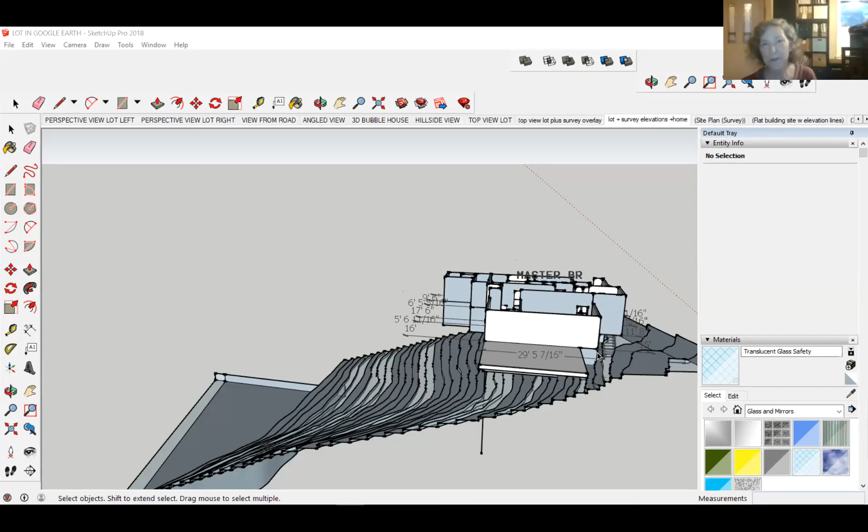Okay, so this is from the side. Yeah, okay, obviously. There's the slope—it doesn't really drop off right there, that's just where the survey stops. Yeah, that looks like a little waterfall there, but it isn't.

So I got it—I put the model in, see, you can see the lower part of the first floor, which is probably about where it's going to be. I don't want it to dip down too much. So this slab represents the garage floor. I see why you can't do what I was talking about.

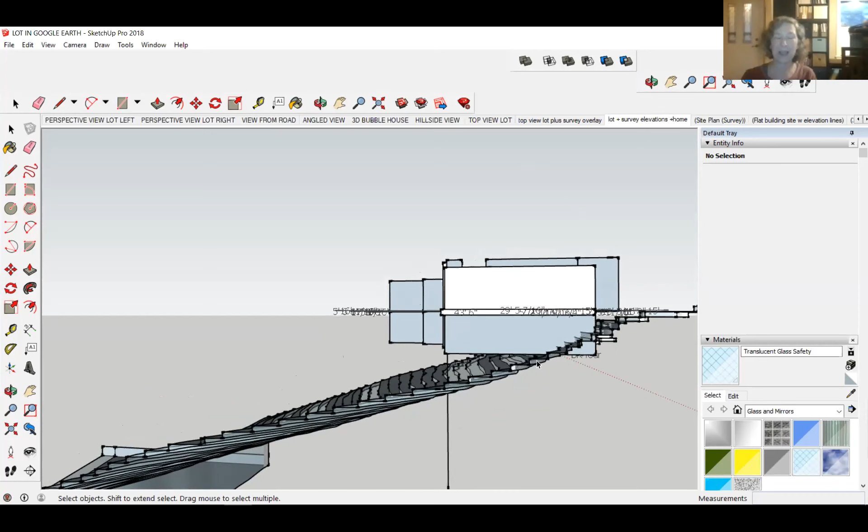And how wide is your site? The site at the very front is 90 feet, and then it splays out some. So can you drive? Yeah, you could—so if that slab weren't there. As you can see, I have it too far to the left here because I just got it set this way. I've not worked on it.

So if you're driving, it would be pretty level, but as far as getting down there—yeah, it's very steep, huh? And then, like I said, it is a pretty steep site. You have to realize my...

Husband might be able to do it. It would be back blind—you wouldn't even be able to see anything in back of you. Well, no, I get it. Big turntable that turns your car around. They do have those. They even have ones where you can flip the car like the Green Hornet does. Yeah, they do? Yeah, they do. Maybe in New York City, you drive in and the whole thing elevates you.

It's an elevator, it lowers your car into the floor. Yeah, that too, you can do that too. I think those—last time I looked—were like between 20 and 30,000 just for the gear. Then you still have to pour the walls and stuff. It's an elevator for your car. Yeah, that's what it is, that's what it would be.

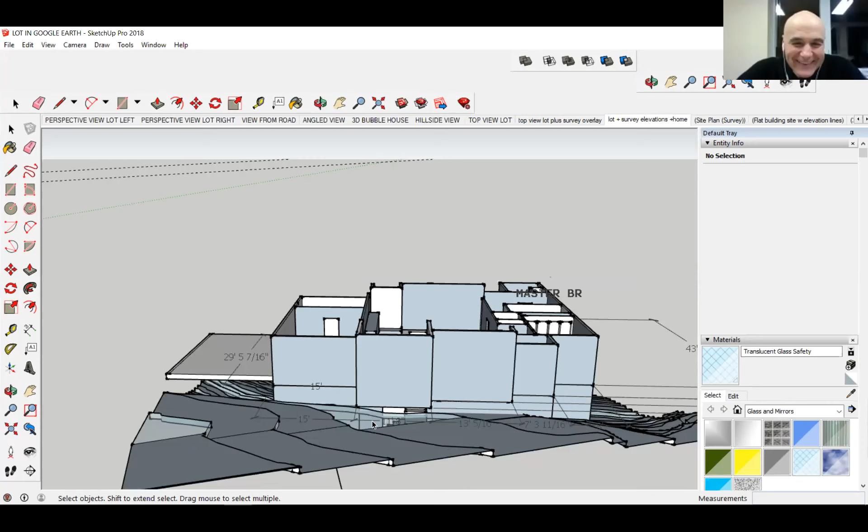But I mean, you could handle driving straight in and then backing straight out, couldn't you? That's still a front entry garage—it doesn't get rid of the neighborhood association's problem. Well, no, you would tell them it's just in addition to your wine cellar, that's why you have to get those cases down there all at once. Right, yeah, no garages. Okay, well, that's harsh.

As I drew this, the lower floor is the same size as the upper floor because I thought, oh, I have to support it, but I don't really need it that big. So is it empty space? So it's sort of like a basement, except it isn't a basement. I guess the walls are going to look finished. So if I only needed 700 square feet, but I made it 1,200 square feet, but I didn't add any more features...

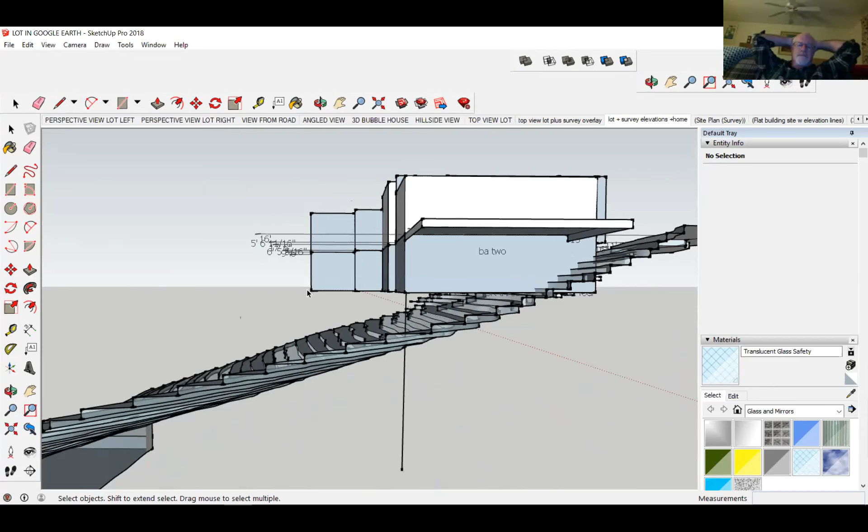I'll tell you, Carol, as a general rule, when you cover that much space that you're not going to use, it tends to become undesirable space - it tends to die. Whatever lives down there isn't what you want living down there. But it's still accessible enough that you're tempted to go in there. And then what happens is people tend to gravitate towards lattice work and other techniques for masking it. And you've got this empty space here, right?

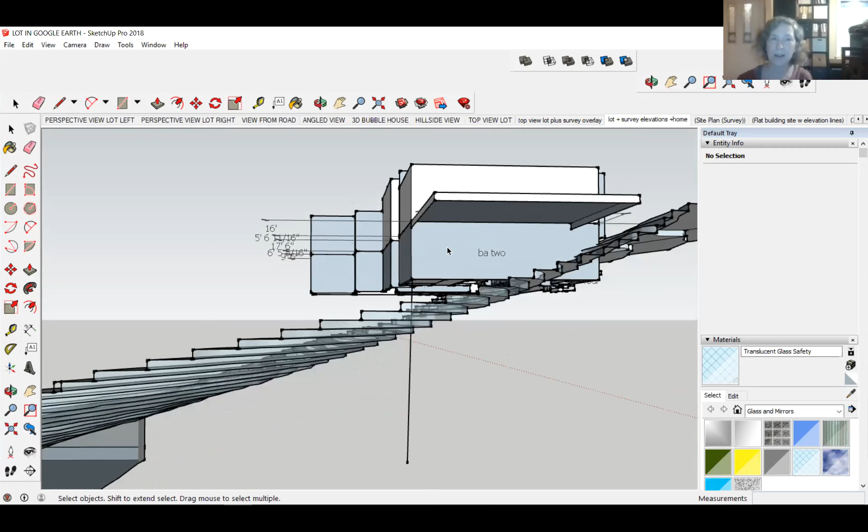It makes more sense to see if you can evolve the design so that it responds more to the site. The site is sloping down to the water. Having a building that slopes down to the water is a much better response to the site. So that would mean inside you'd have to search for places where you could get a few steps, maybe one or two, which is very dramatic.

My husband is 70 and I'm 68. We're just doing one level for the upper floor.

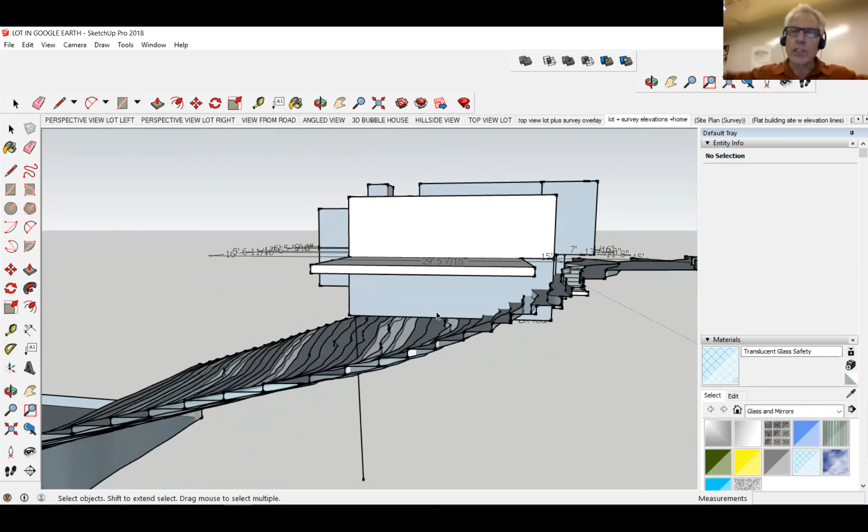One level. Well, then the other thing you can do - knowing that your home association won't allow garages, they called me up last night - is you could get rid of your concrete slab. You're going to have to solve the garage a different way, but now you can spread your house lengthwise along the contours, so it doesn't cantilever as much out over the slope.

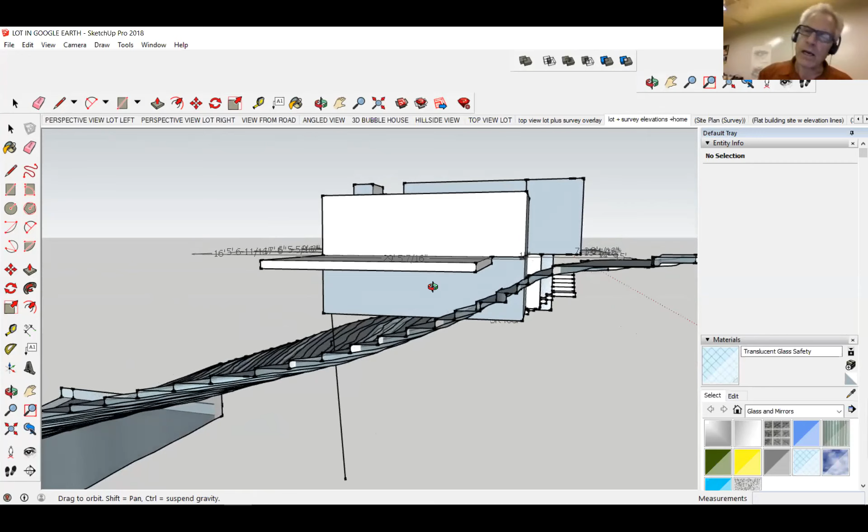In other words, instead of going - what's the direction of the water? Is that south? Right. Instead of extending south, extend the massing and organization of your house east and west. That way it'll stay collected over less slope, and you can put in a reasonable foundation and still stay all on one level. Does that make sense?

It does, but because of the side entry garage, I may not be able to expand it east and west very much. You mean you can have a garage if it's a side entry? Well, right now that's the neighborhood rule. I'm going to try and get a variance or exception, but...

Oh, I thought they said no garage. So you're allowed to have it if you can come in from the side? Oh no, I was joking about in the future - maybe there'll be no garages. No. Yeah, right. I think the future's coming soon.

Right now it's just side entry garages - they don't want to see the facade of the garage. I understand that, they're not pretty. So that's trying to get around it by aesthetically making it look fine. I assume that's their objection - would be the aesthetics.

But right, well, you're right - then it gets more squished this way, and it's going to stick out even more. So it looks like you have maybe a little room on the west side. Yeah, no, I haven't centered it east to west right - I just got it centered on the...

I was trying to get the drive-in level, not too far - it's already like 3 feet down from the curb. That would be enough. But that's working for you because now your site is widening.

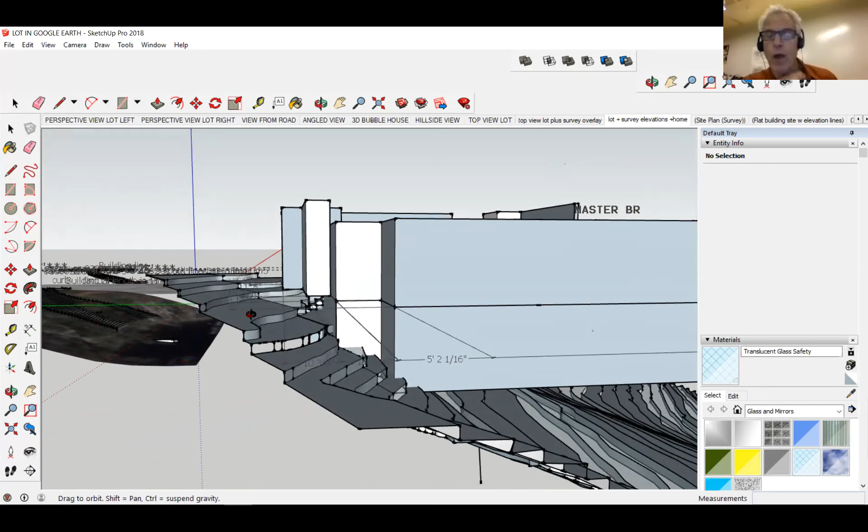So is there a side setback? Do you have to be 15 or 20 feet from your side boundary lines? This line right here - that's the building line. Right, but what about on the sides? Oh, it's an odd one - it's 15 feet collectively, at least 5 on each side. Perfect, so you've got quite a bit of space.

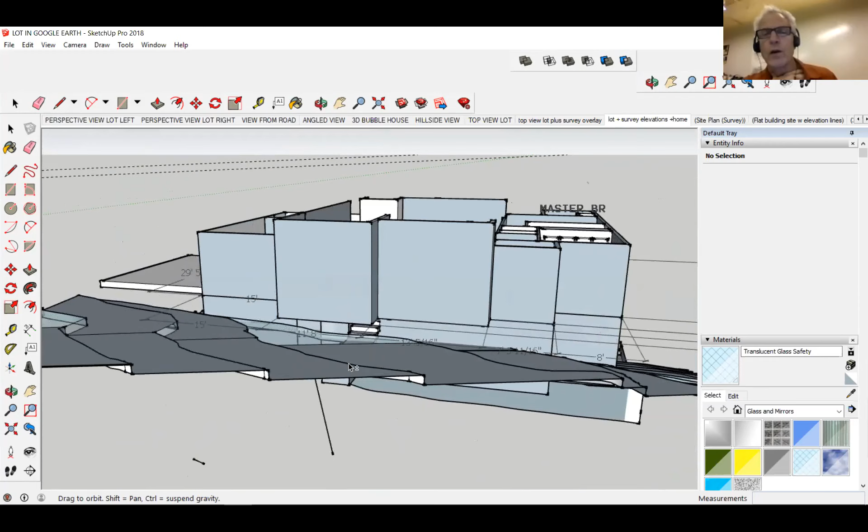It looks to me like you have 20 feet of latitude there that you could reorganize, particularly if you're going to. Right. If I do the side entry garage, I'll have to shrink the house some. I've shrunk it some already. I'll shrink it even more. But if I can do a front entry garage, I can spread out more east-west and pull some of this mass. Right. Yeah. I guess you're in a fork in the road.

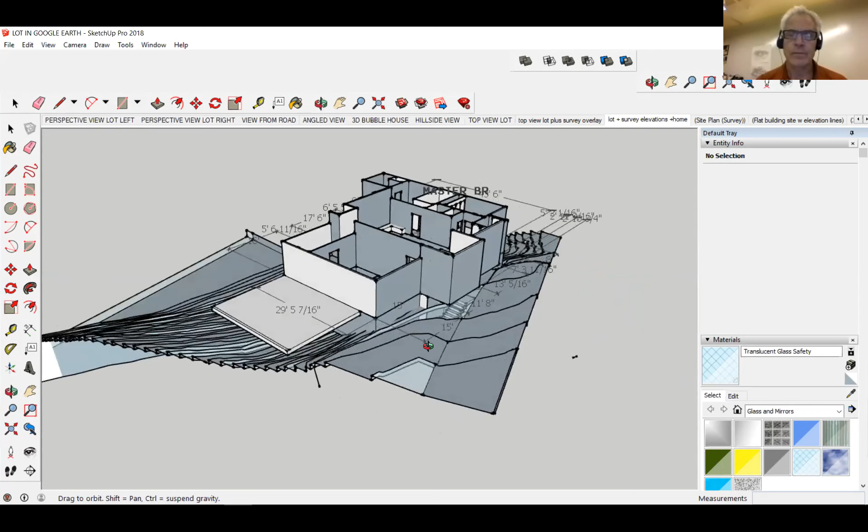If you can get some sense of whether you're going to get a variance, that would be the first step. And then in the meantime, you could assume that you're not going to get a variance and see how you could change the design to compact it more, bring it back a little bit, flatten it out, even though you know you're going to have a garage. Yeah. It's a lot of house for that site.

The other thing you can do is. Yeah, no, I need to. I keep walking around my house and measuring rooms, and it's hard for me to visualize how big a room should be on paper. Yep. Being in the space. So, yeah. Well, it's, yeah. I guess anything I could do.

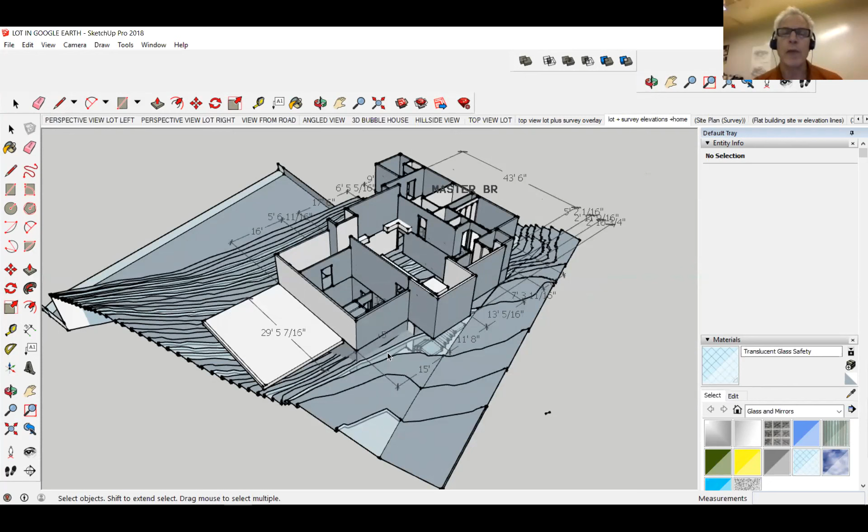I mean, you could start. I know it seems like a painful thing to go backwards, but you could start by just saying, okay, all my mods are going to have to be 14-foot mods. Yeah. Except if I'm doing panelized, then I don't even have to. Yeah. That's true. I'm trying to constrain you. I'm not trying to give you more freedom.

So you're right. With panel, you're moving with every step towards stick building. You have more flexibility, and panel is a big step towards flexibility. You're already in Texas, so you have 16-foot modules down there, even 20-foot modules in some locations. Okay. Yeah, but of course you can't change them. Well, I'll see what Ironwood has.

So anyways, that's right. I'm stuck on this garage stuff, and then I got sidetracked. I started researching heat pumps and stuff, which is way too early to be looking at, but it was so fascinating. It was either in the last set of slides. I was reading about heat pump hot water heaters. Sure, GE makes them. It's like, whoa.

So is there such a thing as the heat pump and the hot water heater all being one system? In other words, hot water heater is very expensive. But I didn't know if you had heat pump for everything, whether there's a big combination thing. No, I haven't seen it. Gio, have you seen a combination hot water and HVAC that's all run by one heat pump? I've asked about that, and they don't exist yet.

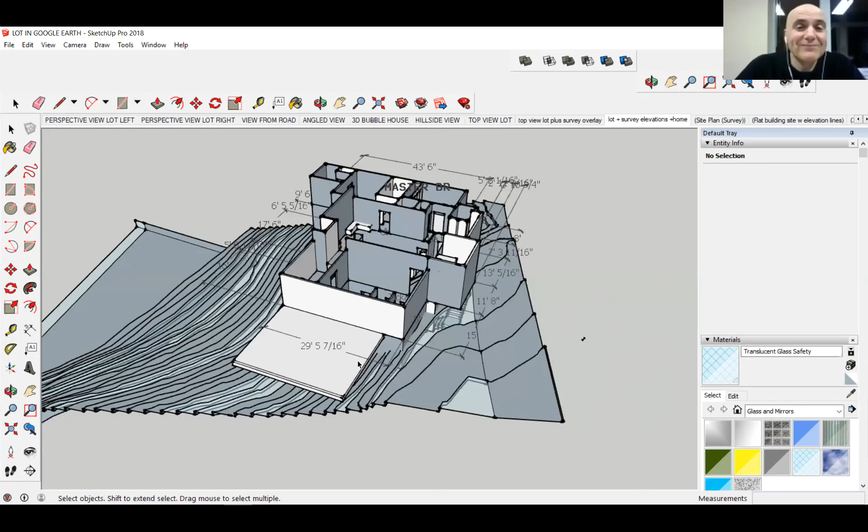Yeah. I hear gas is going to go up in a few years anyway, and it's not good for the environment. So. That's right. You're correct. Oh man, you're saying all the right things. Yeah. Right. So I guess I'm stuck between the tankless versus the electric heat pump as far as the water heater. Well, anyway, like I said, that was a sidetrack. I shouldn't have even been looking at that.

Well, that's good that you've done that. That's a leg up. So anyway, that's where I am. I had hoped I would accomplish more, but I didn't. But I have really one more question for your side garage problem.

Sure. It looks to me like you've embraced at least one full set of stairs. Yes, and I probably don't remember, but here's my stairs. Right. Is that an elevator there? Yeah, because of the wine cellar, a case of wine's 40 pounds. All right. And we'll be getting older, but mainly cases of wine, yeah.

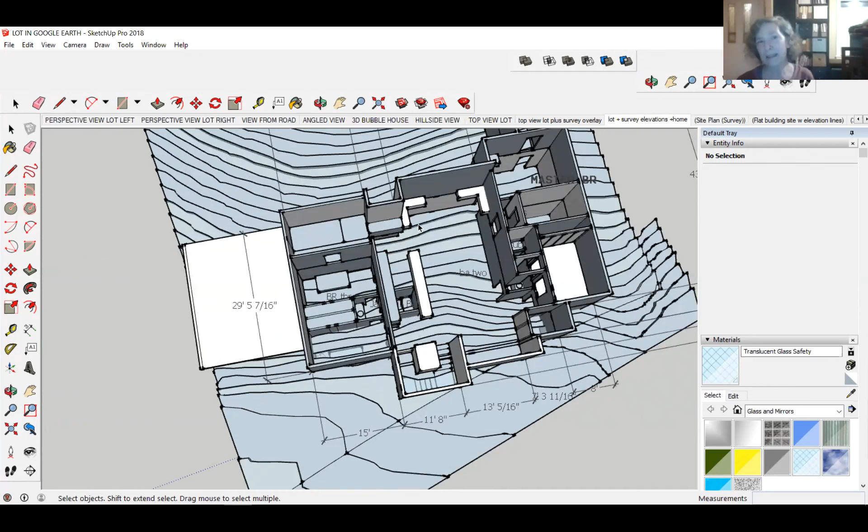So I just had the stairs wrapped around the. Well, no, I like that. That's great. But I don't know whether to put it in the back. That was the other spot, to kind of put it back here. No. The question that I had, I'm still struggling with your garage, I'm thinking, how imperative is it to be at the highest point on your site in terms of view?

In other words, could you slide down the hill a bit? Sure. Or maybe you don't slide down the hill, but another thing to consider is to make the house upside down. Put all the living spaces that are above below, and walk down to them. That way you could actually have a side entry garage on top. And the bigger space would be downstairs.

Yes. The downside of that strategy is that you would lose north-facing windows in your spaces. The upside is that your air conditioning bill would be way lower. All your bills would be lower, because it would essentially be an earth-sheltered or earth-bermed residence. It doesn't mean you would have no north-facing windows. It means they'd be much smaller and fewer.

No, I think there'd be no. If you look at this, I think. Well, maybe a clerestory. That's what I mean, clerestory. And also there's light tubes and other contrivances for getting sunlight in. But the real payoff would be that you would have so much less building up on top that you could actually park and even probably have a side entry garage up there. And then walk down.

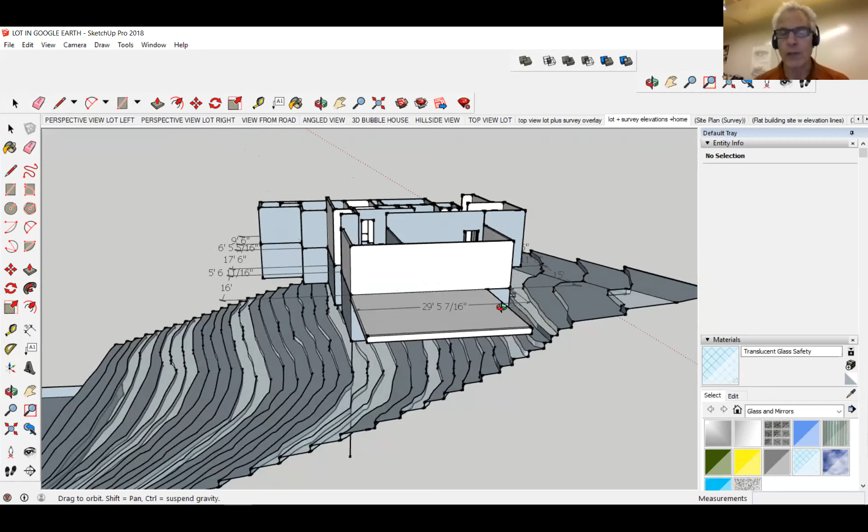Yeah, absolutely. There's a lot of really very satisfying and sophisticated designs that go on steep sites in just that fashion. They really separate where you want to have something that's going to need a really great view. You put that on top, but something like a bedroom, you can put that down below. And for that matter, that's why I've got the extra space down below to start with.

But that whole master bedroom, that's a thought. I could just move all that downstairs, and then I would have more. But like I said, I was just trying to get away from having to take the elevator every day. Practically speaking, it's nice just to live on one level. Well, I know, but you have a challenging lot for living on one level. Right. I'm still trying to have it all, so to speak. Ideally, it'd be nice to just close off the lower level, have some kind of doorway that closes off the stairwell to where we're just heating and cooling the top floor.

Anyway, it's a very instructional project that you've taken on because it demands design. It demands problem solving. It's not just a subdivision lot where you can... Yeah, I should have realized at the beginning. The modular ones I've been looking at, there isn't any way to modify them. Like, well, I need an elevator. It just isn't going to work. Yeah, right.

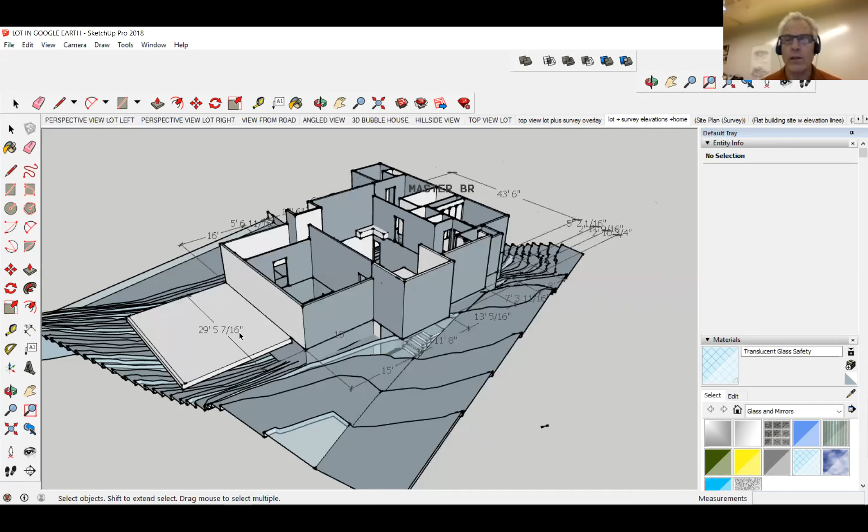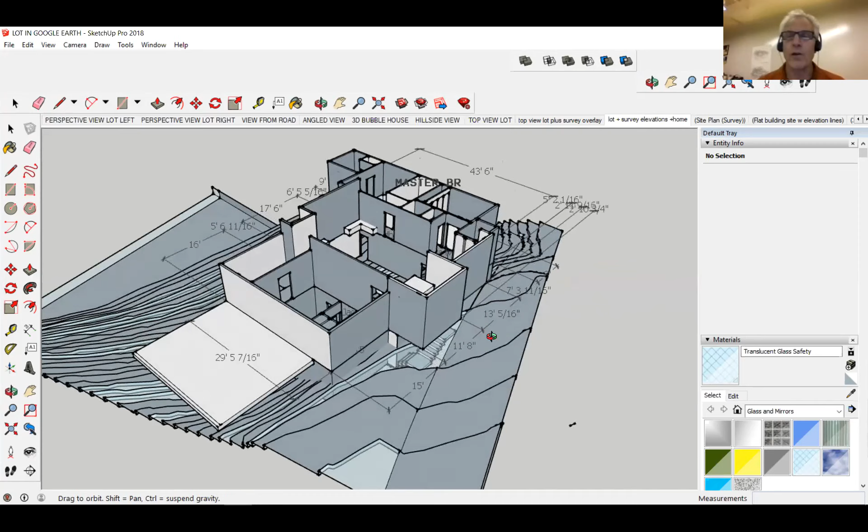You don't have to wait till next class if you want to email myself or Gio about your phone call to Irontown. See what they say. So you want to be on the phone when I call them? Sorry? Or call them first. So call them first. I'm going to call them anyway, but I think you should call them as well and just say, I'm in Texas where all the prefab people don't do custom building, and I understand you do. And just see what they say.

Sounds good. Okay. I'll let you know. All right. Great. Okay. That's it, I'm done. All right, who's next? Come on, step up. Anybody who doesn't have a side entry garage can go now. All right, I'll go. All right, Mark.

So I did visit a couple of builders last week. I went first to Bensonwood. Very impressive what they do. I particularly like their smart panel system. And although I don't at all see using them, it's possible that I would like to, with whatever means I ended up using, emulate a lot of their smart panel ideas.

The visit was disappointing in that I made an appointment. I made it clear that I wanted to be able to see their operations and how they built things. And when I got there, I was informed that their manufacturing was 8 miles away, and even if I wanted to drive 8 miles, they were having an OSHA inspection that day, so I couldn't see it. So basically, I drove 3 hours to sit in a conference room and look at a computer. I have to say, I was pretty annoyed.

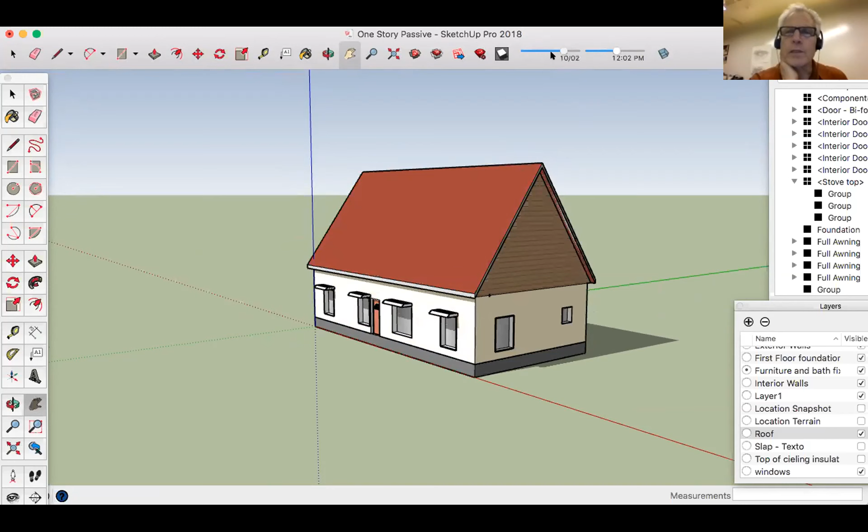From the outside, I did geolocate this, and you can see from the awnings that this is summer. Why is this not working? Oh, there it is working. There's winter, pretty close to full exposure. You're looking at the south side. Mm-hmm. How about summer? Give summer again. I always miss summer. Okay. There's July.

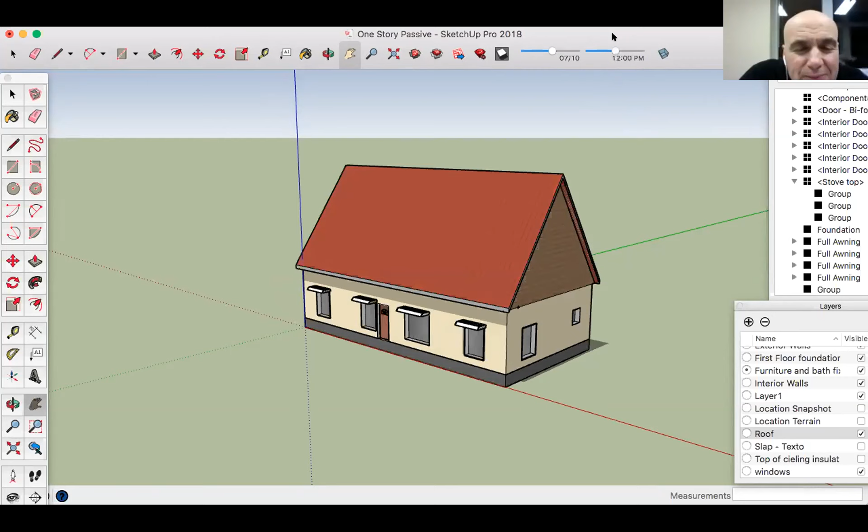Why is this not? Oh, that's because it's 12 noon. Okay, that works. And the windows are completely shaded. They are? Yeah, you can't tell, but they are. Okay. Oh, yeah, I see. Okay.

Two bedroom, two bath. This is the mechanical room here. Entrance foyer, kitchen, dining room, living area, second bedroom, second bath. Laundry? Hopefully be part of the mechanical room. And the mechanical room is next to the bathroom? Yes. Is that a no-no? No. How big is the mechanical room? It's about 7 by 6. That's pretty tight. You don't want your laundry in there.

Your master bathroom, the one to the right, that's very commodious, and you have room there for the toilet plus probably even a side by side. But certainly a stackable, and you'll be a happier guy taking your laundry out into a bathroom than piling it up on a water heater. Because the utility room is just big enough for the CERV, if you're going to use a CERV. Right, I like the CERV.

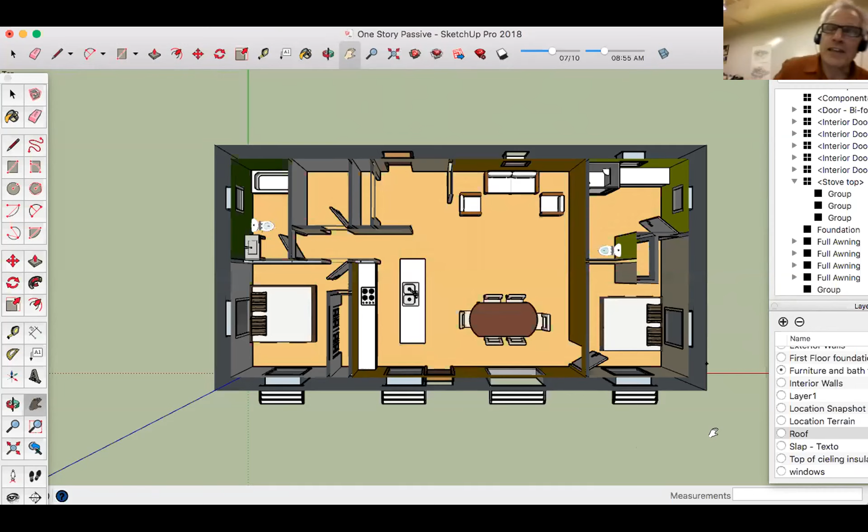Well, I want to applaud you for first mastering SketchUp enough to be fully tempted to make those additional design changes, but not doing that, and instead saying this is just a trial building. The fact that it's not everything you need is fine for the purpose of this course. This is a great design for shopping different systems. It's fully adequate, and we could all spend another 6 weeks tuning it up, but first you have to find a site. I think from here I would start from scratch with what I really want, but I first need to have the site. Yeah.

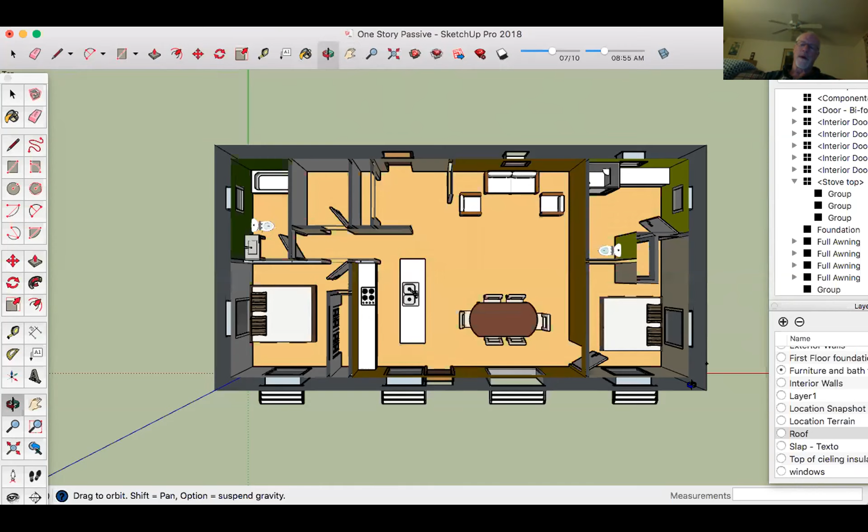But it was helpful for me to have a simple house to get over the hump with the help of Geo with SketchUp. Great. What else would you like to see in this? Just before the class, I did some sections. Aren't they fun?

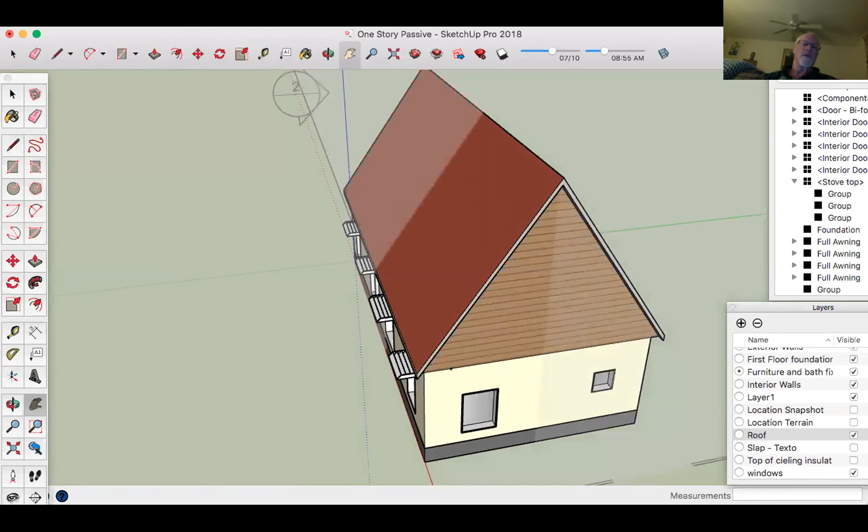Okay. Well. Yeah, there's a lot of space in that roof. A lot of space, yeah. I could easily put a couple of... I mean, I think the 8-foot point is probably about here, so you could have some pretty good space up there. Sure, great.

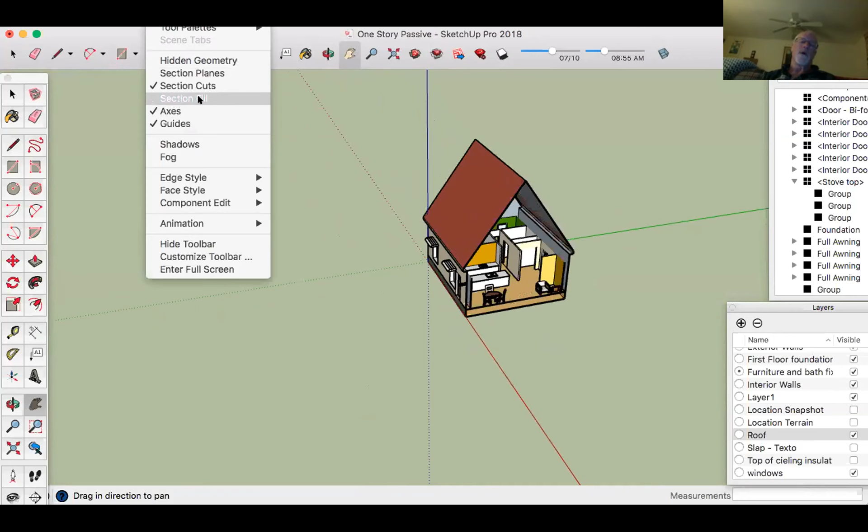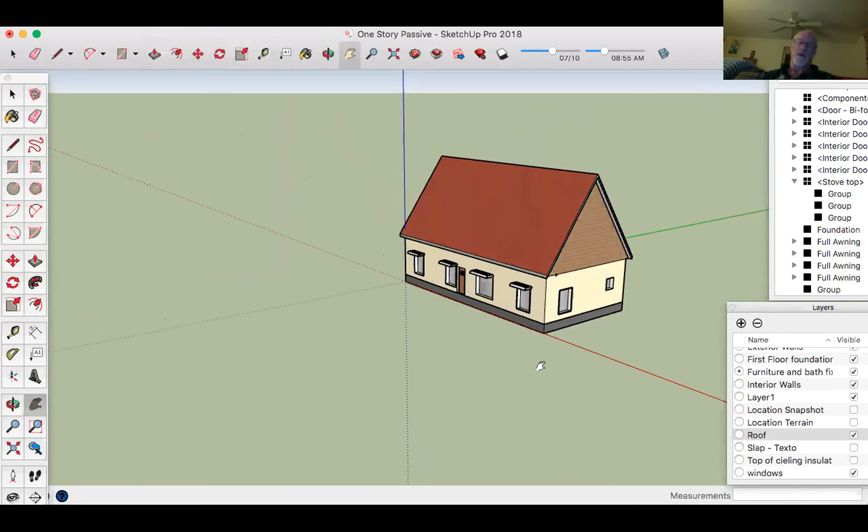Yeah. Well, there's another thing going on here in that NYSERDA in concert with VEIC want to place a ZEM manufacturer in basically my area. Wow. And in fact, along with a contractor friend of mine, we're in discussions with Peter to actually start that manufacturing. Nice. That'll be exciting. I'd like to track that. That sounds good. We all want to have a ZEM factory in our neighborhood. Yeah. So I'm pretty excited about that.

Timing seems to be kind of perfect in that VEIC is concluding a contract with NYSERDA for this program. So, and Peter seems to be pretty high on it. So, of course, a zillion things could derail it, but it's something that could happen. Oh, nice. We'll look forward to hearing more about that as it becomes available. Yeah, that's great.

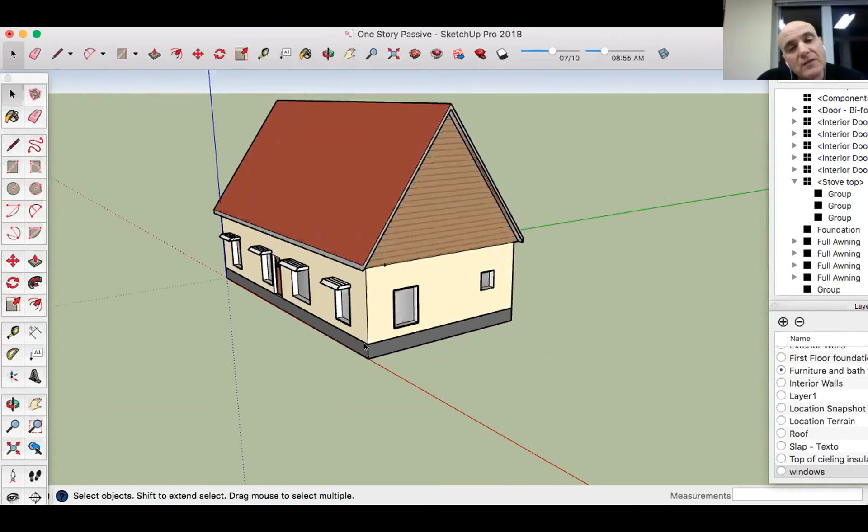The only other point I was trying to make is that when you're doing this, the hot box you're talking about, you'd have to arrange your bathrooms and your kitchen so that the drainage doesn't have to travel that far, because there's a slope to the pipes as they're traveling. What is the slope that's required for that? I think it's a quarter inch for every foot.

It's somewhere between an eighth and a quarter inches. If you go more than a quarter, the liquids will outrun the solids. If you go less than an eighth, even worse things happen.

Use your imagination. Right, I can't imagine what you're talking about. No way was I trying to dissuade you from trying something new, but just keep in mind there are practicalities you have to think about.

I have more solidly come to the conclusion that I do not want a basement. When I've done the numbers on it, I think the whole idea that it's free space is incorrect. No one said free, I said cheap—I don't know that it's even cheap. Other people I've talked to have been supportive of that. Besides that, I don't like doing stuff underground, so I'd rather put the space above ground. There's radon and all those other issues too.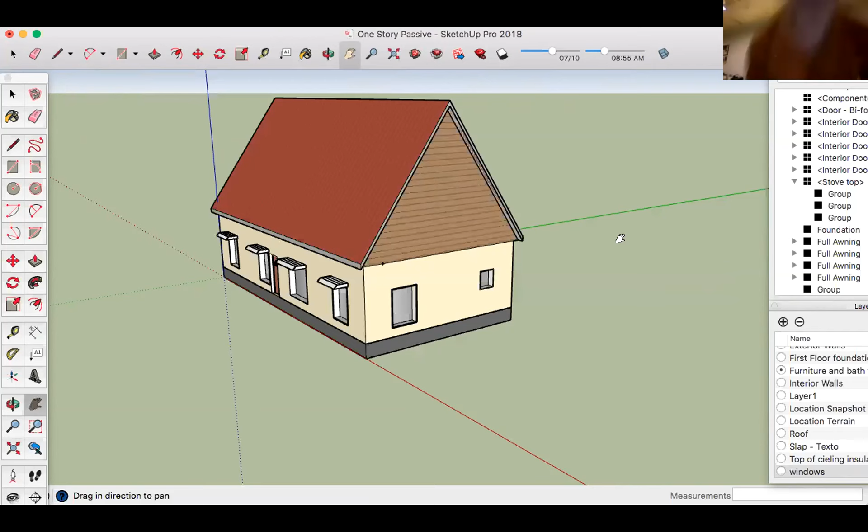So you've got 4.5 feet that a person can do some work in there. If it's a really tall guy, even if he's on his knees, he's probably gonna be bending down a bit. But if it's a normal sized person, then at least you've got some room. And you really want that room for a person to get down there and do that work.

So the condo that I live in has a crawl space underneath, and I'd say it's close to 5 feet. Yeah, and I think that's adequate. I've done stuff down there, and it's okay.

Another part of the motivation is I'd like to be as environmental as possible, and I'd like to be foam free. A foundation with just a crawl space can be foam free, but any kind of a slab is going to need foam.

The other thing is, by making it a crawl space, you don't have air going through, and you're tightening it up, you're helping tighten up the rest of the house. So if you really want a house that's tight, and you don't want air going through underneath the crawl space, this helps pull out some of the air that's in your home. It just makes sense.

At one point, I was very attracted to the idea of a polished concrete floor, but the word I've gotten from one of the workshops is that even with a ton of foam in there and insulation, it's cold.

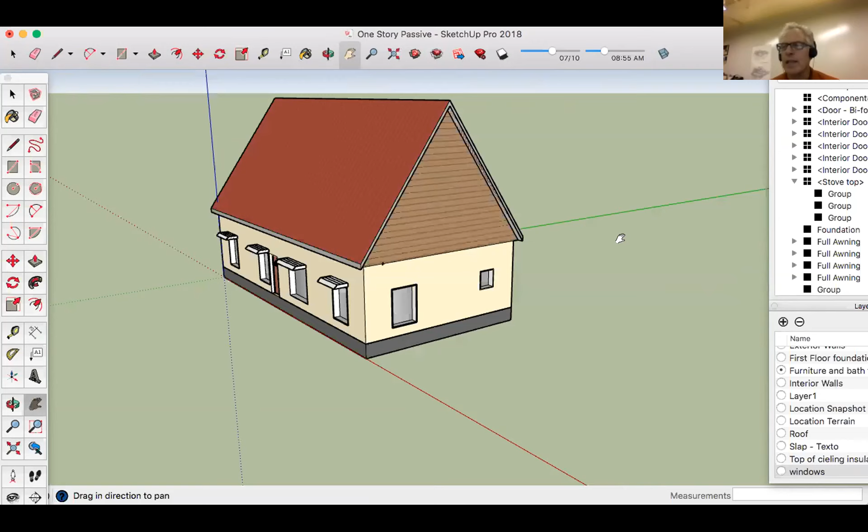Where I see it mostly fail is where people embrace it as a cost-cutting measure. Oh, I'm going to put it all on piers and save all this money. And then, yeah, they get the job done partially, but it doesn't look good. And it's not an enhancement to the house. It looks just like what it is, an attempt to save money.

So I guess what I'm saying is, just like Gio has just said, if you go in with your eyes open and really design it all the way through, not just, yeah, it's going to sit on this foundation made of piers, it can be hugely successful, and it might save you money. Which is always a good thing. I like the might part. I was assuming it definitely would save money, but I've been around too many money-saving deals before.

Mark, nice job on the model. It's come a long way since you showed it to me. Yeah, that's compelling. So, all right. Do you have any other questions? Nope. Thank you. All right. Wonderful. Okay. Ron and Joseph, who's going to go next? I'll jump in here. Shoot. Can you hear me? Yeah, very well.

Hey, you know what? With a time commitment, 3 teenagers and a new job, I'm afraid I'm just going to have to audit this time. I see this as a terrific opportunity, especially to tap into resources like you guys, but I just don't have the time to do it justice. So that's where I'm at. Okay. I think if you worked it right, you could get those teenagers to help you. The ones I know are very good with computers. Teach them SketchUp, maybe they could do it for you.

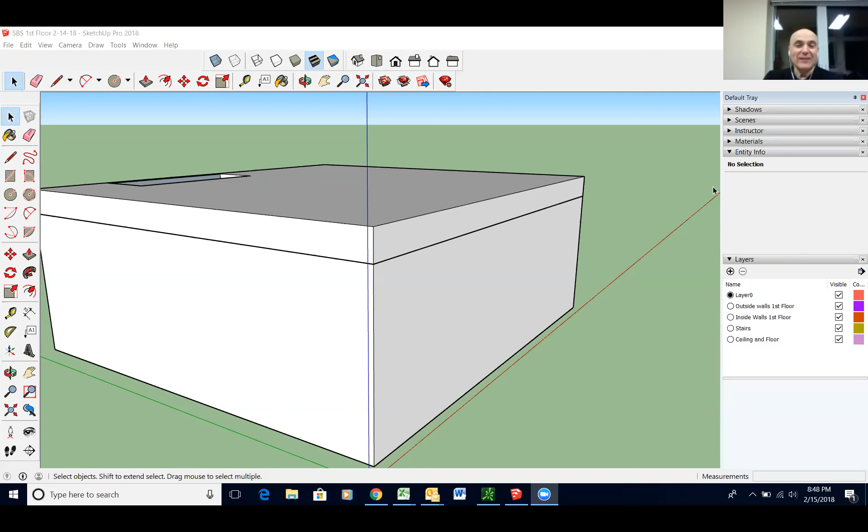So do you want me to go into my design? Yeah. Show us what you got. Okay. Well, it's not as much as the previous two, that's for sure. But let me. You see that? Yep. Talk about boxy. That's boxy, that's for sure. Let me, I got to get over to the screen. Let's go right to the stairs. I did the stairs. Where's the garage? It came out right. What happened to the grooves that we were working on? There's the stairs. All right. Okay.

Okay. The picture is on the wrong side here. Let me just move this. Okay. Great. I got to request some help. I am challenged with SketchUp, and it's really slowing me down. So I'll be reaching out to Gio or John to give me some help. Mm-hmm. We've only been hounding you for the past 2 weeks. I know. It's all right. It doesn't matter.

Yeah, right. We need to reach a little further. Today was a Utah powder ski day, a powder day. Okay, so I do have my priorities. I know there's no powder days out there. I was out there since our last meeting. You were out here? I was in Park City. Is that right? Oh, Park City doesn't get the snow. Alta does. You go to the wrong place. Well, I agree. Yeah. I heard reports. Park City is not good.

Anyway. But I did do some interesting layers and whatnot. Let me take off the other side. This right here is the ceiling for the first floor and the structure of the floor above it. Let me just. Oops. You gotta see the little black dot? Take that off. Layers, yeah, take that off. Put it up to layer 0, and then you're set. Okay, now you can. There you go. Okay. I put the walls in.

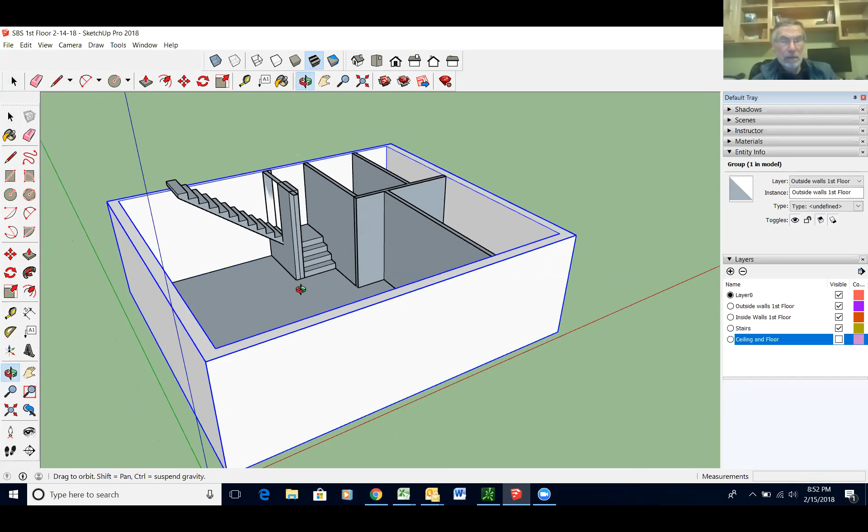Okay. The entryway is here, utility room here, bathroom here, and this is an open area, the kitchen back here. Oops. Yeah, which I haven't expanded yet. But I did take your suggestion, John, about the kitchen. I think it lays out much better. But there was a wall in here, and I put some furniture in, and this is really, really tiny.

And I'm trying to figure out a way of using modules, but get a little more room. And I need the room down here, not on the second level. No problem. It's too bad it's not dotted in, but you see what's called the marriage wall or the mate wall that runs between the 2 mods right there. So there's nothing keeping you from taking the front mod, the view mod, and just stretching it further to the right to give you more

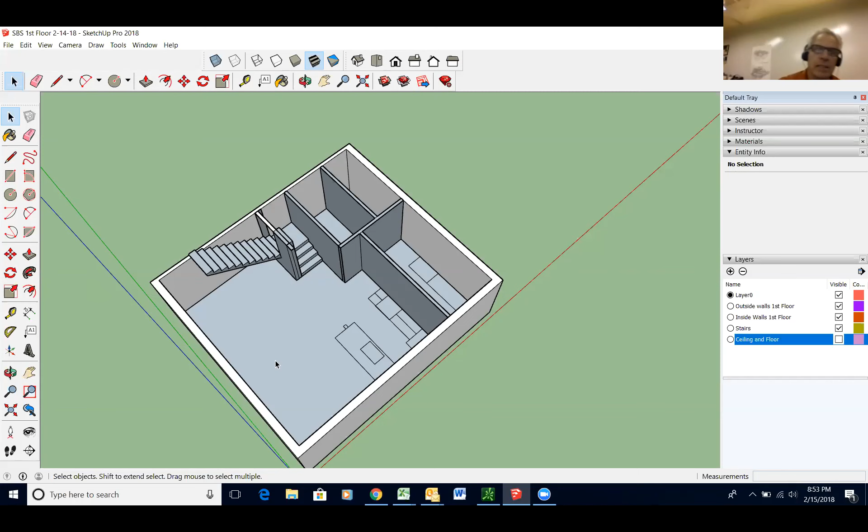living room. If you keep the back mod the same dimension and stretch the one in the front out a bit, you're not only going to have more area to put furniture, but you're going to get a northern view window that can look back. It doesn't need to be a big window, but it's nice to be able to see all sides. I'm not following you, John. Right here is the split line. Okay. Right.

Right here, there is a post because I eliminated some of this wall. Right. So if you go to the other outside wall, the one to the east, the eastern wall. Oh, okay. That one. So there's going to be a split between the front and the back box, right? Right. So if you drew that line in, let's see. Now I'm putting you on the spot. How would you do that?

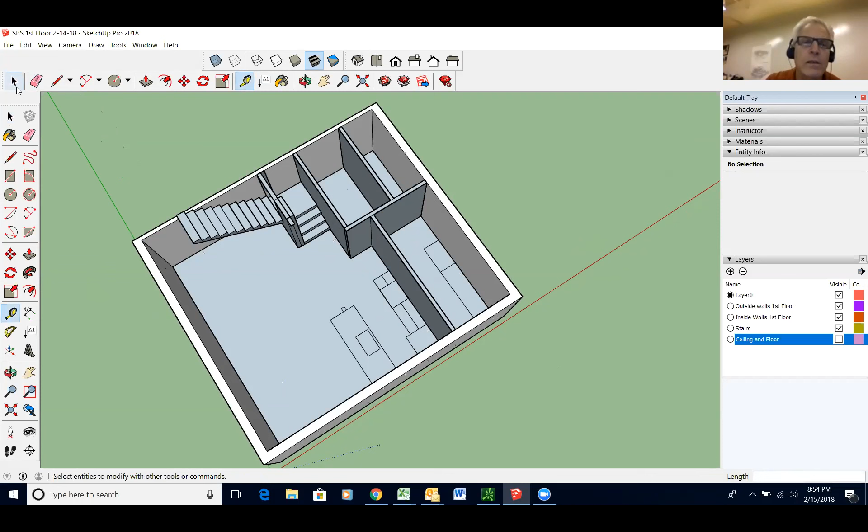You would get your tape measure and pull it from the front corner, right? Or no, rotate it up a little bit. Just rotate your model up a little bit so we can see that. Oh, there you go. Okay, that's good. A little more. That's good. Now take your tape and put it on the corner. Just hit T. Okay. Not there, but about halfway down the corner of the building.

Right here? No, halfway down. See the corner of the building? Yeah, right. Now go down to about halfway. Slide it down. Okay, right there's fine. Now take it and pull 14 feet to your right. You can just type in 14 feet. All right, wait. You got it, don't worry about that. Okay, now just type 14 feet. There you go. Return.

So now take your pencil and draw a line down there. I'm gonna be sloppy here for a minute. Actually, now draw the line up over the top edge there. Be sure it's on axis. Don't go to the midpoint of the group. You might have to zoom in on that. Okay, that's good right there. Boom. Now take your push-pull tool, it's just P. What am I going to push-pull? Tell me what you're going to push-pull right there where your cursor is.

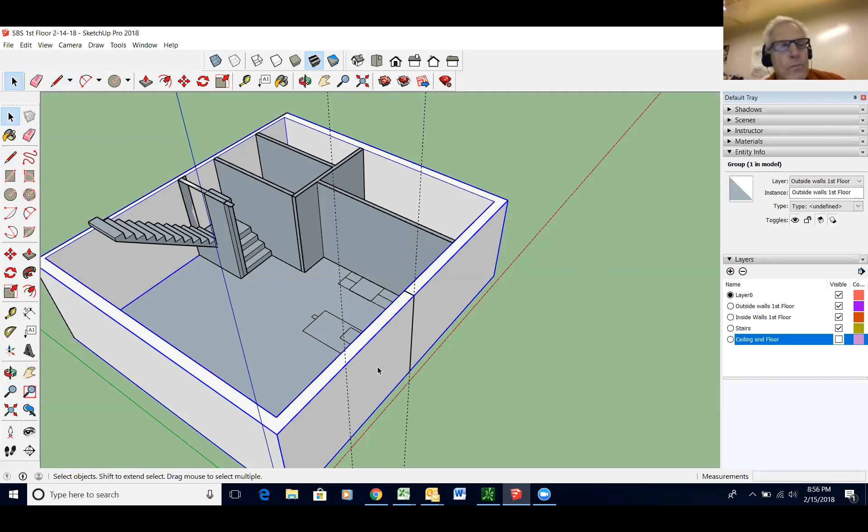Oh, you got to open the group. Okay, that's fine. You're going to have to draw the line again. That's all right, just draw it right over that one. Yep, and then down. There we go. Okay, now push-pull that. Which way? To the right? To the right, say 4 feet, 6 feet, whatever you like. There's a limit, okay. Now you got to rotate around so you're looking at the inside of the model, because you got to draw the inside line. A little more rotating.

What am I looking for? Oh, there we go. Now we're talking. Right there's good. You got it. Okay, draw that line down. L or P for pen or L, whatever. Yep. Okay, good. Now take your tape and measure.

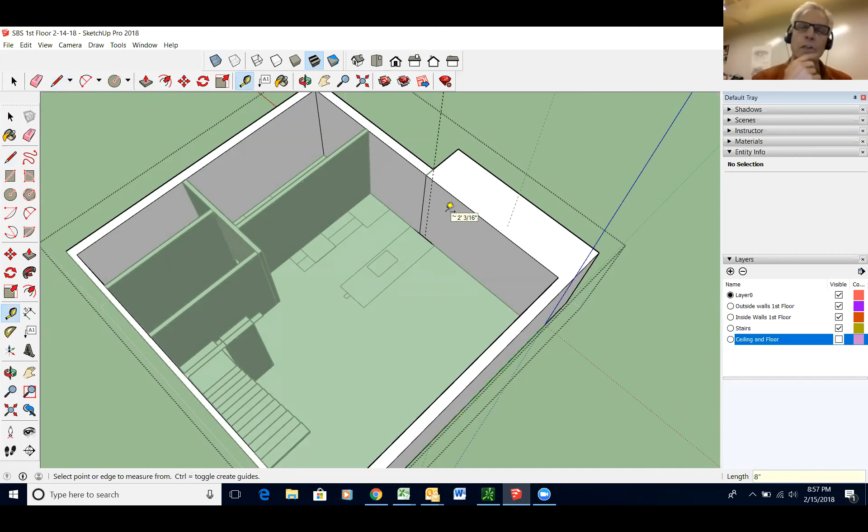Take your tape and put it anywhere on that line you just drew, and pull it in 6 inches or 8 inches, but just pull it to the right. 8 inches? Sure. I don't know, whatever your exterior walls are. Usually they're 10 inches. Okay. Well then, now draw a line there.

Right. Okay. Now use your push-pull. What did you pull that out for? 3 feet before? It was, I think, 4 feet. 4 feet. Okay. So use your push-pull tool and push that inside surface. No, not the tape. Oh, I see. You're just measuring 3'10".

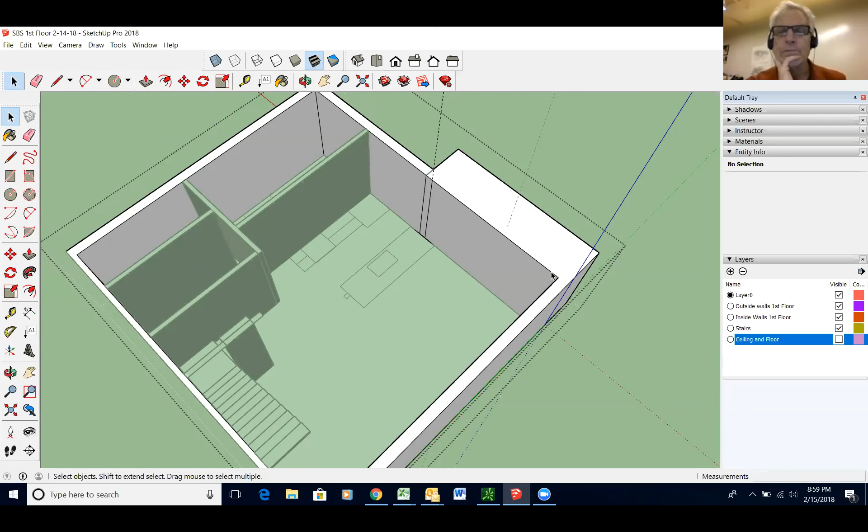But how can you do that? Because I thought you told us the box was 50 feet long. No, they can go up to 72 feet. Oh, okay. That would help a lot. Yeah. That would help.

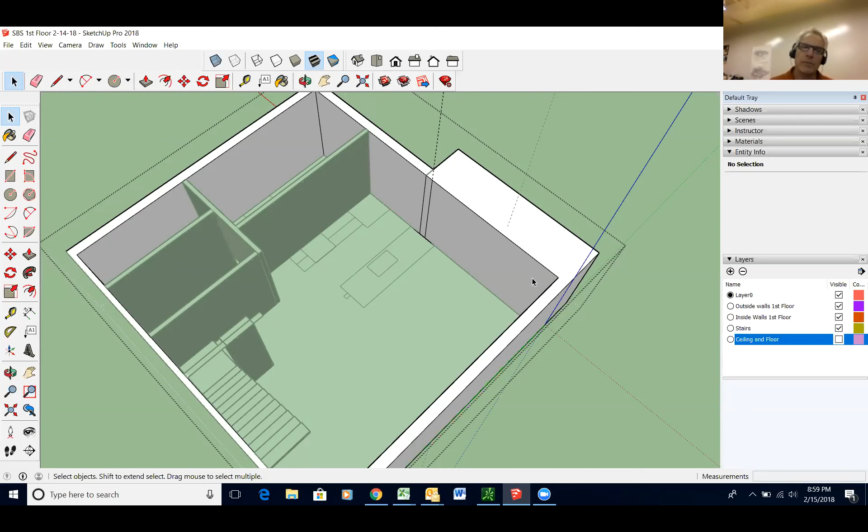Now, Ron, I have to apologize because, in the interest of time, I just urged you to do a lot of fairly sloppy SketchUp work. So as an exercise for the student, you're gonna have to go back and clean this up. Like you want your exterior walls to all be the same thickness, and stuff like that. Right. But you can see that you could extend this quite a bit more than 4 feet. That would help tremendously.

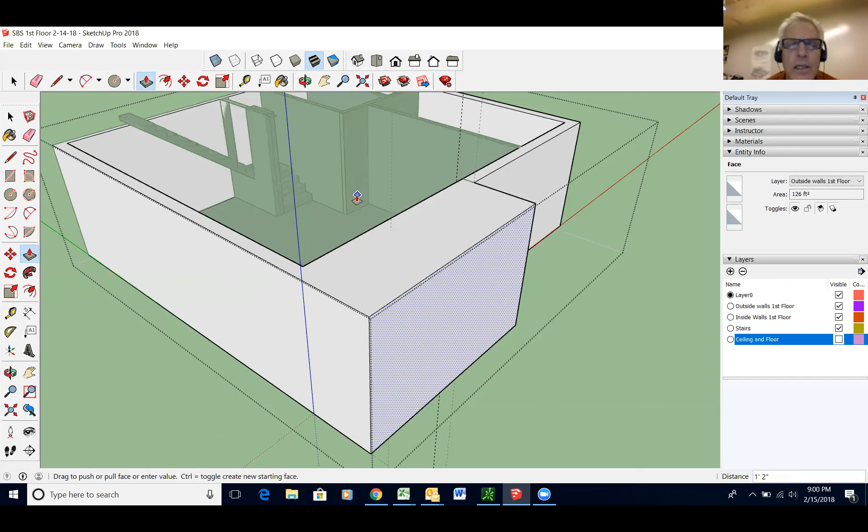Yeah, and if you extend it, let's just do something. Flip it around and just pull it randomly out a bit more. I just want to show you your opportunity for a window. Okay, so just pull that out another 1 foot 2 inches. Yeah, boink, 1 foot 2 inches. Okay, that's good. Now go on the inside. How thick are your walls? 10 inches? Yeah. So push the inside wall 4 feet 2 inches. That one there, just push that 4 feet 2 inches.

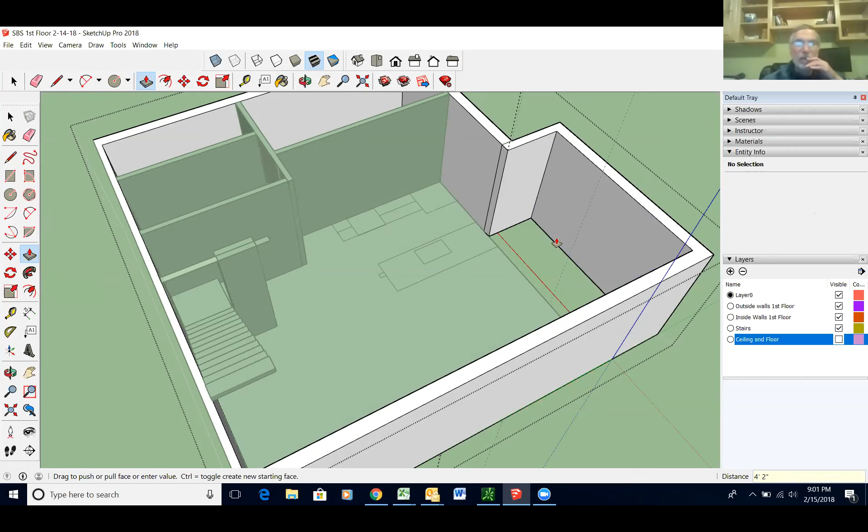Whoops. Yeah, Control Z. Yeah, that's it. 4 feet 2 inches? Yeah. Okay, there you go. So what I wanted to show you was, you see how now you just stretched that out 5 feet, but you've created this little wing wall to the north, or to the non-view side, that gives you some opportunity as far as design goes.

If you put a little window in there, it could be a little place to sit or a place for coffee or whatever it is. Every window has many opportunities. So whatever you do on this side, presumably you do on the other side. It's a mirror image. Well, okay, that does solve making this area bigger.

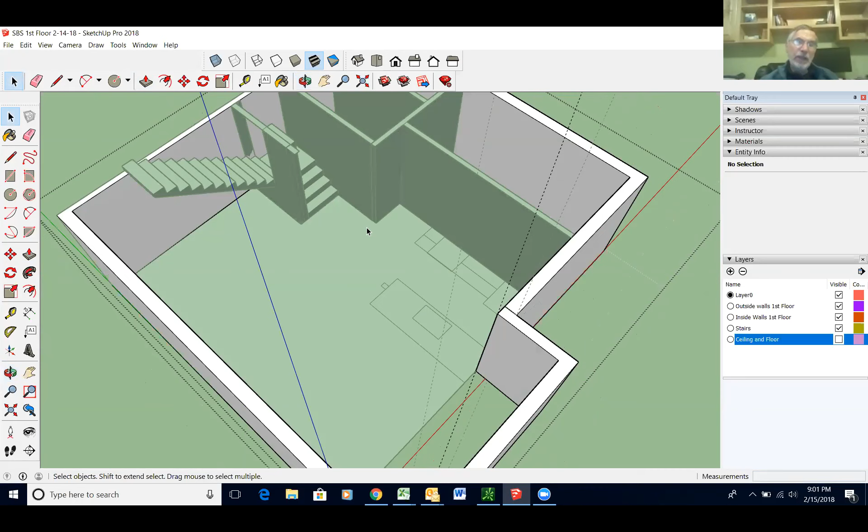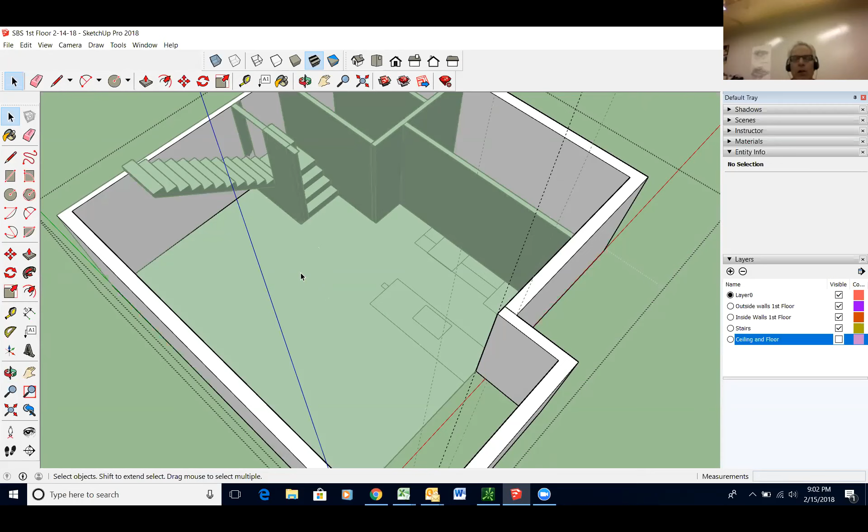It does, but I should point out that you did something very smart. We went right over it. You laid out furniture to figure out how big that space was. That's a very smart way to get a sense of the space. So you need to do that again with the larger space. Yes. Right. I wanted to get a little bit more. I really want to see what this thing is going to look like on the outside.

The other thing is this bath. Let me hold it 1 second. Sorry. This is a bathroom, and it's the size of the bathroom that we have now, and it's fine. It's small, but it's okay. The utility room, I wanted the washer and dryer in here, and the utility room is really, I don't think, adequate for washer and dryer and the other stuff. You're just looking at it and you're saying no?

No, it's not. Well, you could put a stacked washer and dryer in there, and you could have a little bit of storage along one wall. It looks like that's only about 4 feet wide. It is. Not even. It's 3 feet 8. Yeah, it's not going to work. It's tight, Ron.

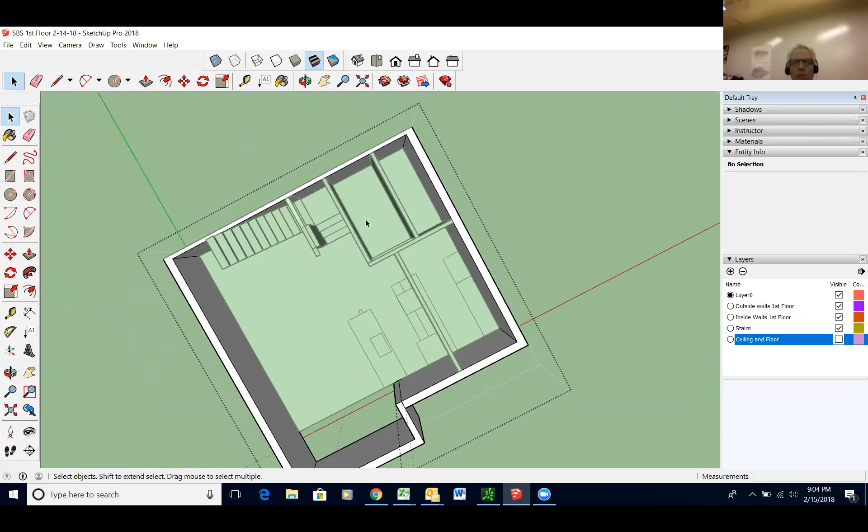So it almost might be better to reconfigure, maybe turn your bathroom 90 degrees or something. Is that just a half bath that you've got downstairs for your guests? No, that's a full bath. There's room for a bathtub here. Why is that? There's no bedrooms on this level, are there? The idea is that if my friend couldn't climb stairs anymore, he could make a bedroom down here.

Okay. So then in that case, to give more room to the utility room, you could move the stairs. No, you couldn't. Well, maybe you could. This is support. That's the double wall. What I'm thinking is, why not move the stairs fully into one of the modules? Make it so that when you come up to the top of the stairs, you turn here, towards the east. And then by doing that, now you've got room to move the bathroom to the end of the module, and now that room comes to the 3/8. You probably got double 3/8 there, so now you got more than enough room for everything.

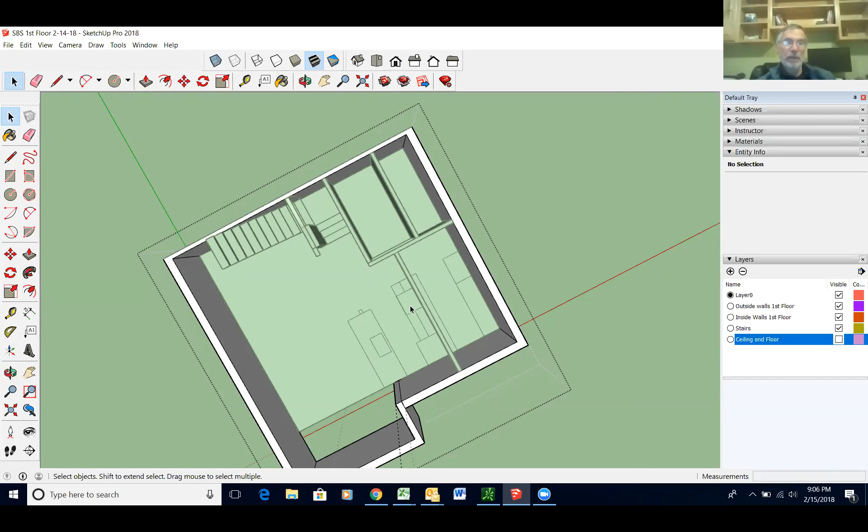The problem with that is that the stairs take up a lot more room upstairs, and that is really tight right now. Right. Okay. This is very efficient. I like that. That adds a lot to it. But I think the answer is somewhere... I realize that the bathroom access has to be at the bottom of the stairs there. It's all that's left.

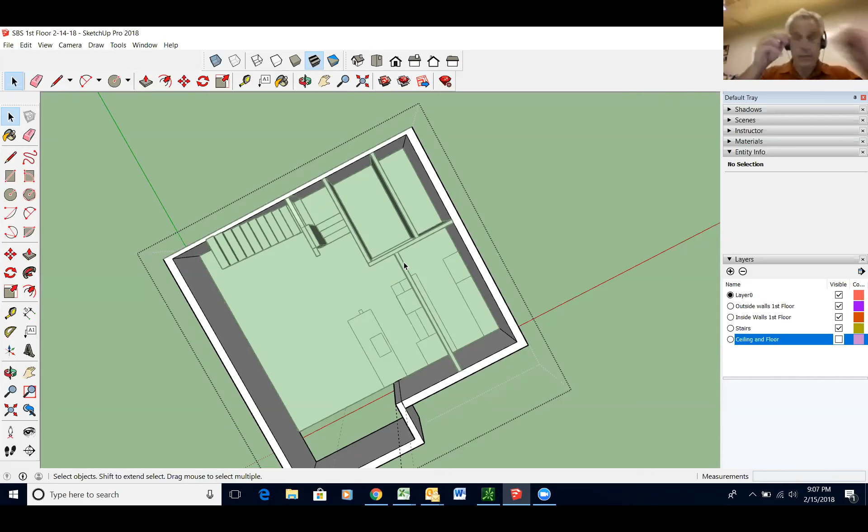But if you move the back wall of the kitchen a little bit to the rear so you could put a door in to the left of that wall, then, well, that wouldn't help either, actually. What I'm trying to do is... What if you put the stairs in this nook you created? In the what? The bump out over here with the window and the stairwell. Oh, I love that idea. That's worth exploring. Do you see what Carol suggested, Ron? Yeah, move the stairs over to here. That's interesting. Yeah, it's an easy thing to do.

Isn't the stairs a group? Yes, it is. So you just click on the group and copy it. It would have to be turned around. No, I'm going to show you how to do that. You want to take control? No, you can do this. You are ready for this. So just click on the group. Don't open it. Just click on it. Just identify it. There we go. Now Control C, copy it. We're going to leave it right there. Oh, okay. You got a copy? I did Control C, but okay, good.

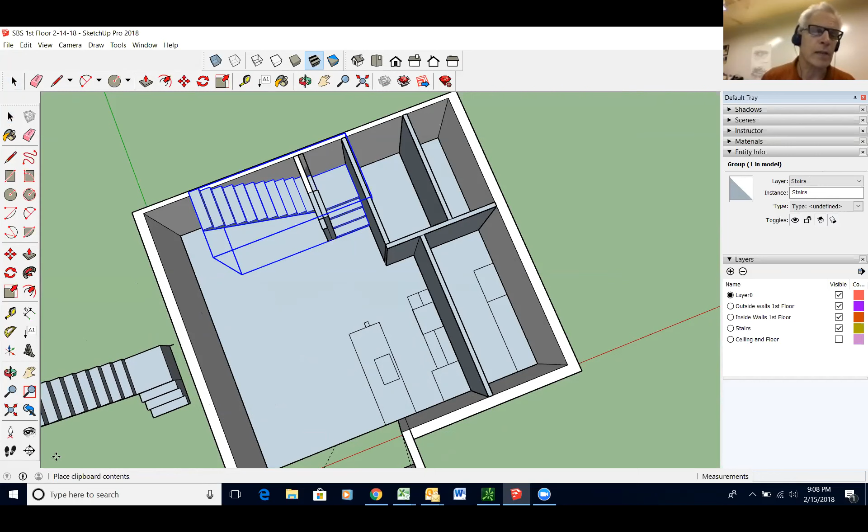Now do Control V, and that'll paste it, and all of a sudden your cursor will turn into a move. Okay, so now move your cursor. See, there it is. Now move it outside your model. We want to mess with it a little. That's good, right there. Now type S for scale. There we go. Now rotate it a little so you can get at those handles, those little squares. No, don't do that. Get your orbit tool and rotate the whole model up just a little bit. Your orbit tool is the one that rotates the whole model. I think you can just hit O.

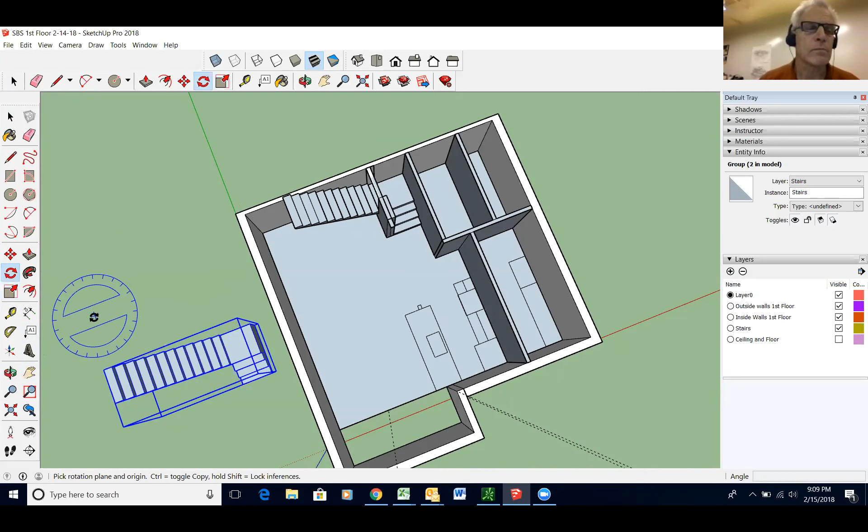Type O. Yeah, there you go. Now just rotate it up a little bit. Just rotate up. Yep, that's it. There we go, it's coming. Okay, good, right there. Now that's good. That's fine.

Now type S again for scale. Okay, now take the handle, the little square cube that's right in the middle of the surface on our side. No, right in the middle. Oh, not that surface, the side surface. Yep, that's it, right there.

That's the one. Now what we're going to do is we're going to turn this thing inside out, and that's how you're going to reverse it. You just stretch that up away from you and it'll sort of snap in when it's right. So I left click.

Okay, now go the other direction. Yep, go right. Yep, keep going. Keep going, go right through it. See this? Okay, and then, well that's a little excessive, but now you want to go back to, just pull it back to the width that it was.

Yeah, right, it's 40 inch. You're gonna have to rotate a little. Maybe I should take over here, because you've now got one handle covering another handle, and that's an invitation for disaster.

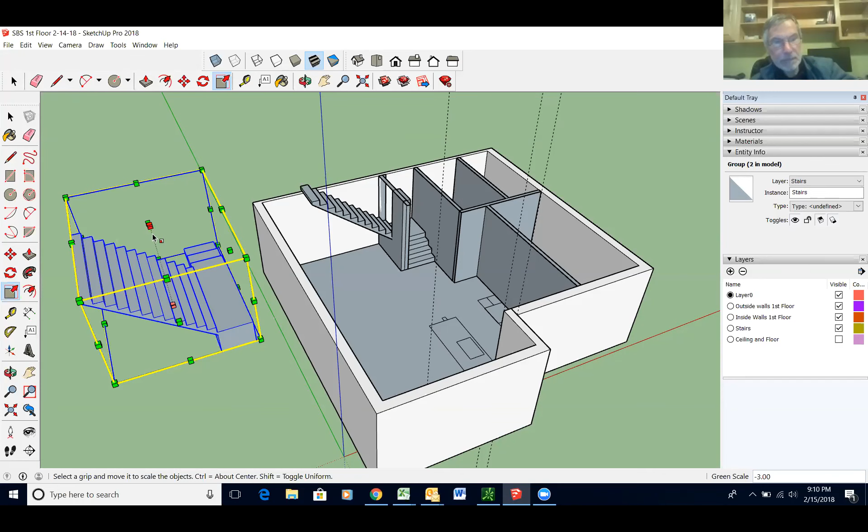Is there a way for me to get controls? Gio, do you know a way to get me controls? I think, here, let me just. Sorry, view options, request control. View options, request. Okay, it says view options at the top and says request control, and it's okay. I got them, I got them. Okay, so.

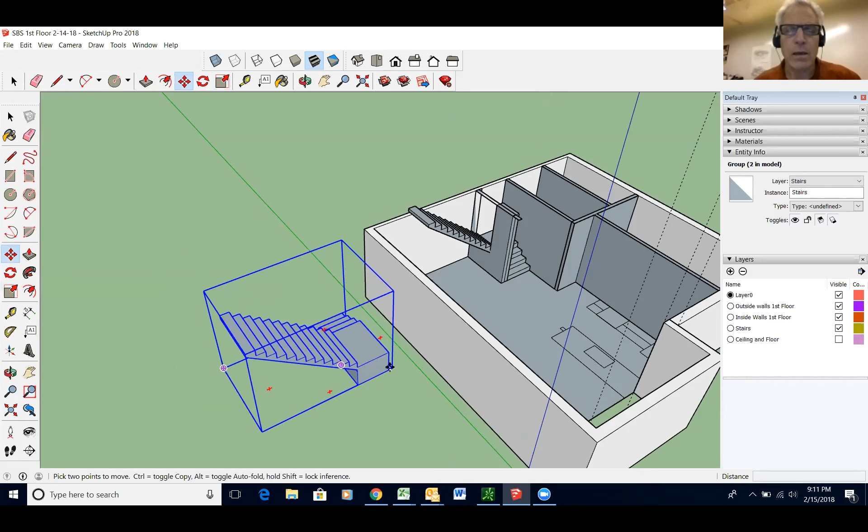Usually snaps, there it is. Okay, so now I can just move this thing. There. I'm going to do this. Push it up a bit.

Gio must be itching. There's nothing more frustrating than watching somebody else do a SketchUp. Am I right? Is it true? It's true, it's true, it's true.

So this thing is a little bit off, but it's enough to just experiment with Carol's idea, which we see right away, we see a few problems, but

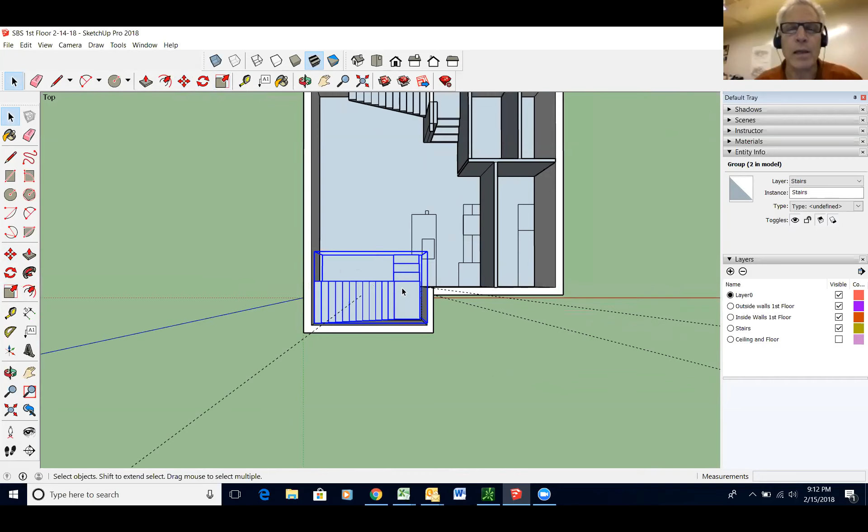if you actually flipped it, if you maybe flipped it so that the front stairs came up and it went back this way. Yes. Well, I think I'm going to leave that as an experiment for Ron.

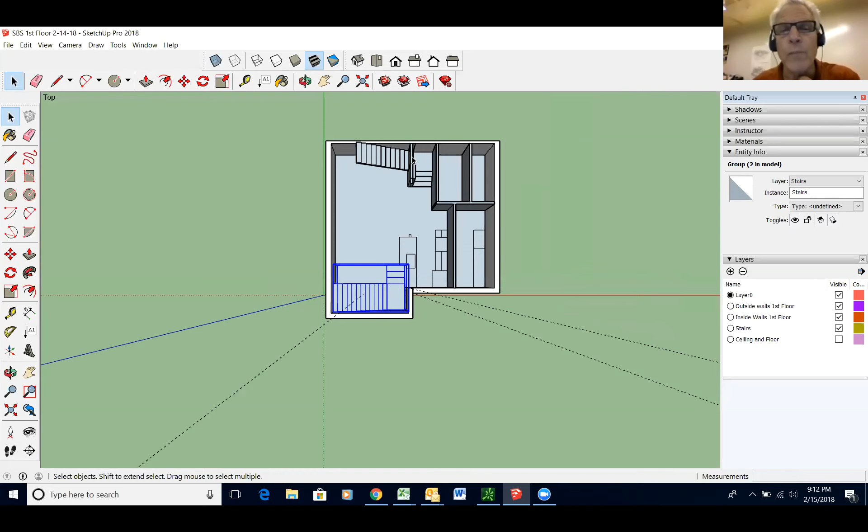For Ron, because see, the challenge with this approach is this stair goes this much, it goes all the way to the mating wall, and then it goes through the marriage wall and down here. We've squeezed the whole thing in so that it's really, if it was to be the mirror image, it would have to be more like this.

Right. And then I think this will, well, doesn't after all. Let's see if I can. So,

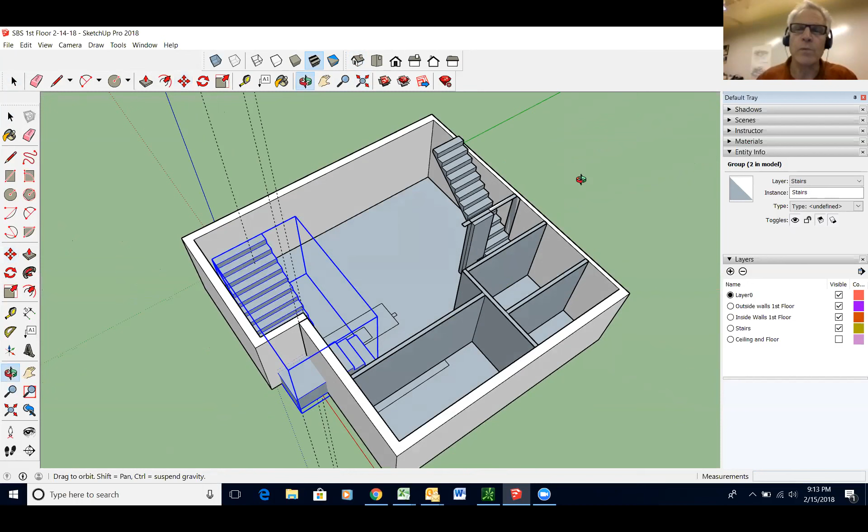Ron, this is a good demonstration of what's possible within modular, which is to say that now what this is suggesting is you could take a little bit of the rear mod and stretch that out as well. But before you run off and do that, I think what this shows is that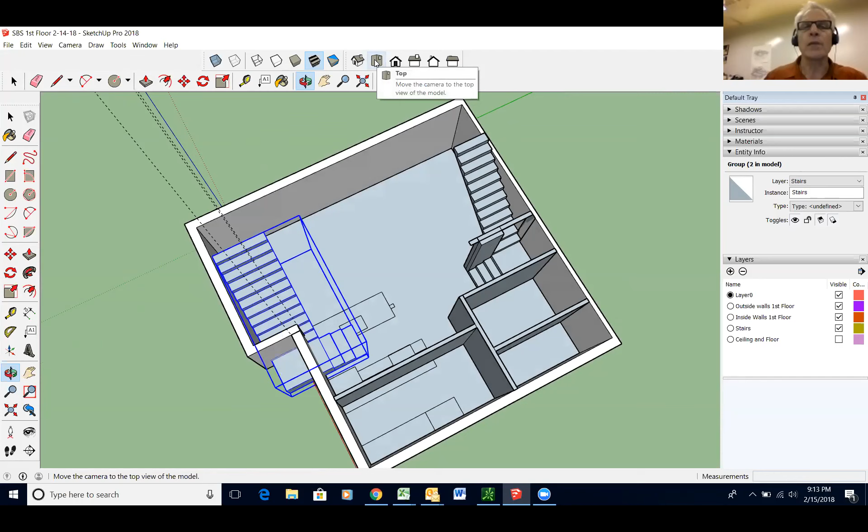Carol's suggestion is a good one. It just is not a plug and play one. You've got to play with it. You got to play with it, and I think what John is suggesting is probably the right direction to go to.

What's your, oops, it's still a little bit. Still a little bit weird, it's a little bit wide. Yeah, it's slightly wide. Yeah, to say the least.

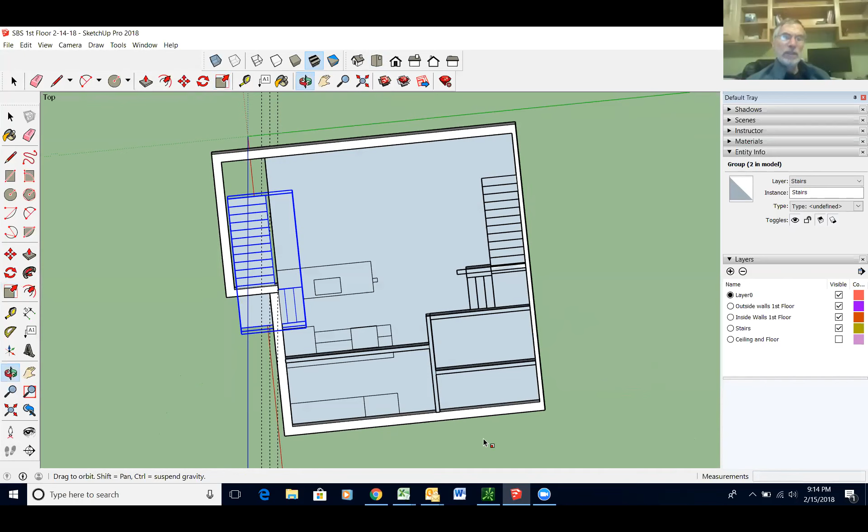Anyway, we'll just talk about it in plan. So the problem here is that if we put it exactly the mirror image of what's over here, then it doesn't fit into the mod.

If we were to move it so that it fits into the mod, then by the time you get to the top steps, you're into a wall. So what that would suggest is you come up here, come up to a landing here, and then come this way in. I don't know how that relates to your upstairs, but this little conflict between the kitchen and the first string of stairs can be resolved by just stretching this out enough. Right.

So instead of the stairs coming at a right angle like this, if you stretch it out another 3 feet, you can have these stairs come all the way around. You go up the stairs to a landing, maybe up 2 more stairs on the landing, then up this way to a landing, and then the final few stairs up this way.

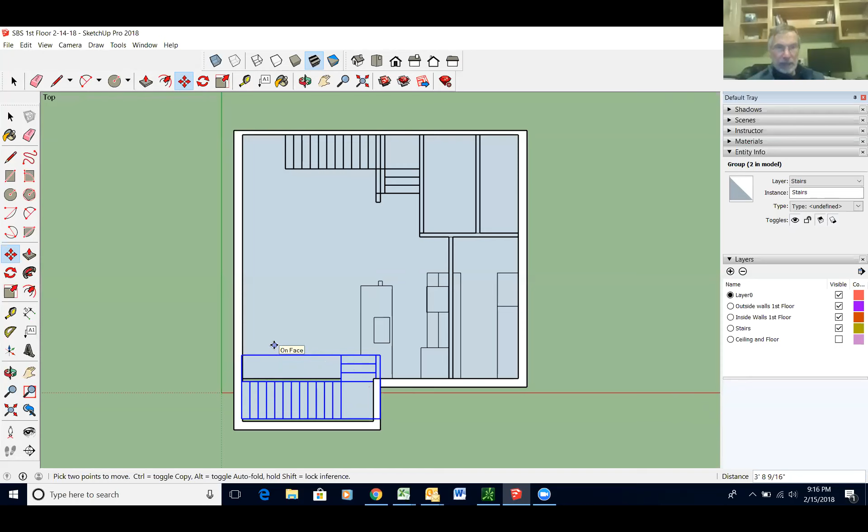I see what you're saying. This is what I think I want to do with this, right? Okay, yeah, this right here is really...

This is the view of the lake, and then you put stairs in there, it just ruins this whole thing. You mean the corner view? Yes, the whole corner view. There's going to be sliders here, so it kind of disturbs it.

What I want to play with a little bit is make this back module bigger also, and fool around with these 2 areas, and maybe flip the bathroom, and make the bathroom go this way, so I have more room.

Ron, I'm not quite sure how I get access to this. Ron, listen. If you took your stairs where they are now, and never mind moving your stairs - if you took the stairs where they are now, and just placed them into the first module, the module that's closer to the lake, you could do what John just said, making kind of like a U of a stair. Now that gives you that much more room to move.

Somebody's typing, I'm having a tough time hearing you. Oh, I'm not sure who's typing. Oh, that's me, I'm sorry. I wonder if I can mute myself. Hold on, I'm responding to a chat query, and I'm also eating crackers in bed.

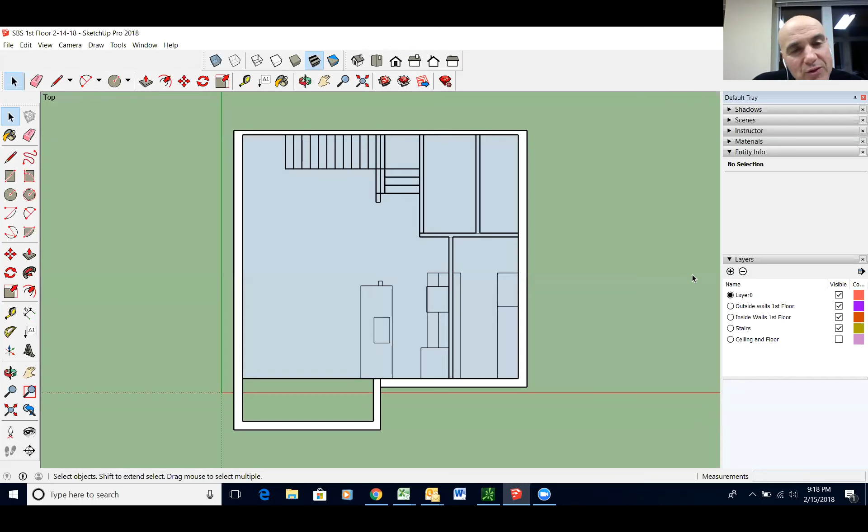Anyway, so as I was saying, if you were to take the stairs and do what John suggested, but move them towards the lake on the side that you've got them on now - now, that space, see the space that you have where your landing and your stairs are, how wide is that?

Measure it, how wide is that? Get the measuring tape. This is 40 inches.

Okay, so you would have that 40 inches added on to your utility room, because you would move the bathroom to where the stairs are, and now your utility room is 40 inches wider. And it actually kind of helps to put in your door anywhere you want now for that utility room.

So how would the stairs - where would you enter the stairs? The stairs would... let me get control, let me show you.

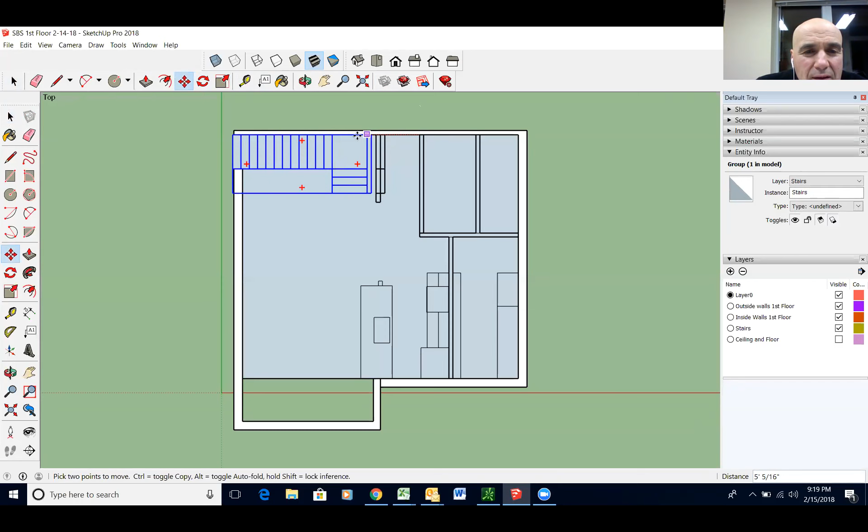There we go, yes, all right. So, see these stairs here? If you took them, just for the hell of it, let's just do this. Now, they would have to be reconfigured so that - okay, so that's the wall, so let's leave it there. Okay bear with me, look the other way. All right, we do this. All right, so there's your stairs.

Now, if you took John's suggestion and you made these stairs and turned them into a U shape - you came up, you've got a little bit of a landing, you come up, you got another landing, and then you got a couple more steps up to the top floor. Now, this space here, you move this over, now that space translates into adding it to this space here. So now you got a much wider utility room.

If you wanted to, you could put in your laundry, your washer and dryer side by side, or even stack it. And you've got more than enough room to put in your utility.

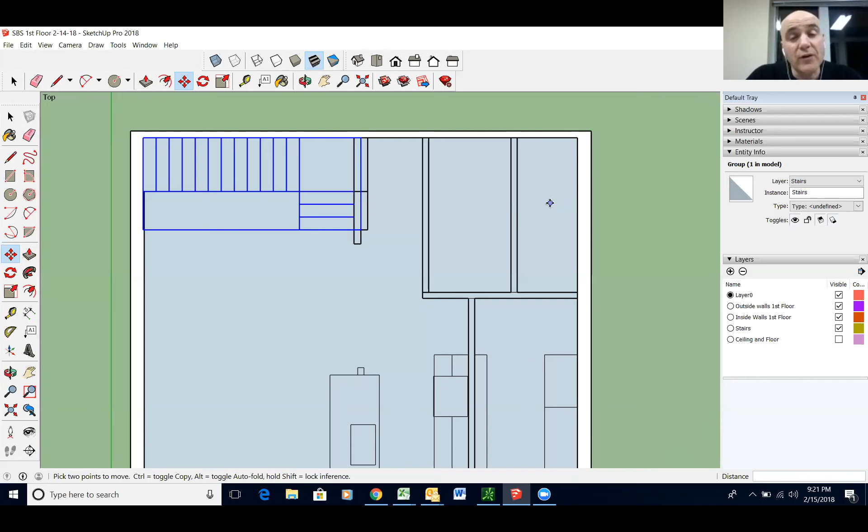So you're saying that whole 40 inches adds to this? Yeah, it becomes 40 inches wider. That gives you more than enough room in the utility room to do what you want to do. You still have to be mindful of what you're putting in there.

What is actually going in there? If you like, the ERV takes up room. So 6 by 6 is for the ERV, and then what's left you could do for— wait a minute, that's 36 square feet. That takes 36 square feet? Well, it's the machine, it's the ERV, and it's all the piping leading to it, that kind of stuff. And you may have room for a hot water tank and maybe an expansion tank.

But this is what you want to do, you want to play with it. Not to interrupt, but while you're on the ERV—Ron, this is on a slope site. Is there not space underneath this thing? No, this is not on a slope, this is a level site. It's on the lake, remember? It's on a lake, and I've got to put a frost wall foundation in there. I'm just wondering if the ERV can go in the basement. The idea of them putting it in the module is to keep everything inside.

It didn't seem like they had that big a utility room in those units. Did you go to Vermont? No, I haven't, I'm in Utah. From the talk that Peter gave, he had sketches of some of the houses, and it didn't look like that big a utility room.

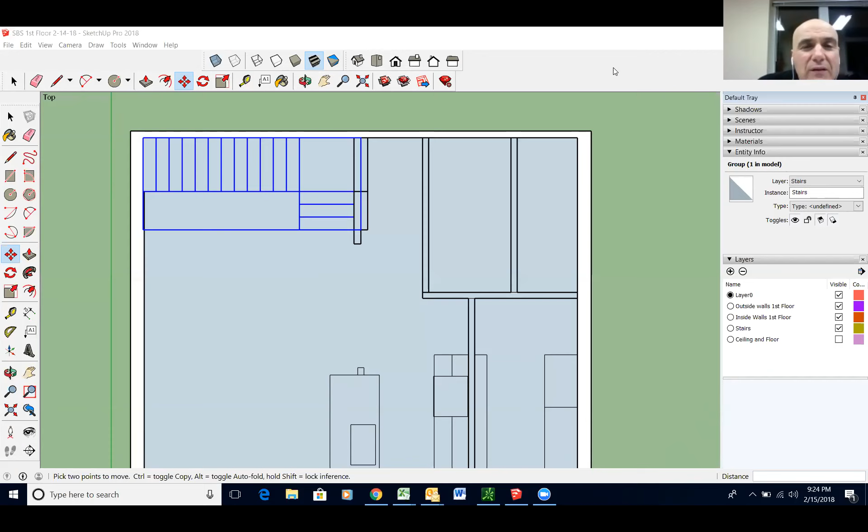Here. Okay, what if I did that? Do you see that at all? No, you don't see it. Huh, interesting. Do you have it up on your screen and you're trying to share your screen with everybody else? Well, it says here I'm already sharing it, but I guess you guys aren't seeing it. Now let's try this, hang on, I'm going to stop sharing screen, I'm going to do this.

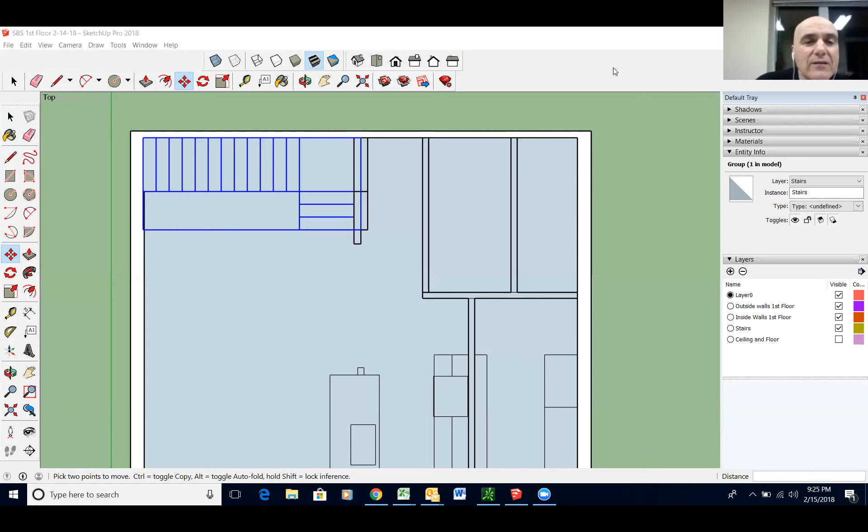Oh, here we go, hang on. All right, here we go. Let's try this now, share screen. No, that looks promising. Let's do this, okay, this one. All right, here we go. Can everybody see this? No. You don't see these pictures? Yes, wait a minute, you got to change it on. I see it now. You know what you do is each person has to go up and hit choose share options. I see it, do you see the two pictures of the CERV? Yeah, there they are.

Nobody sees them? Do a new share. At the top, if you move your cursor to the top of your screen, everybody, down will come a tab, and on the right side of the tab it says View Options. And if you click on that, then you choose Yestermorrow Design Build. Yes, choose that, and do you get it? I'm not finding this. It's top, next to the green bar. Right next to the green bar it says View Options. Correct. Mine didn't see that. Okay, got it.

Okay. Everybody got it? No. Ron, just slide your cursor up until it looks like you're sliding it right off the top of the screen. But I'm seeing that, but that option is not available. It doesn't. I got remote control. You don't have a view options tab? No. Oh, wow. Okay. All right. Well, so much for that idea.

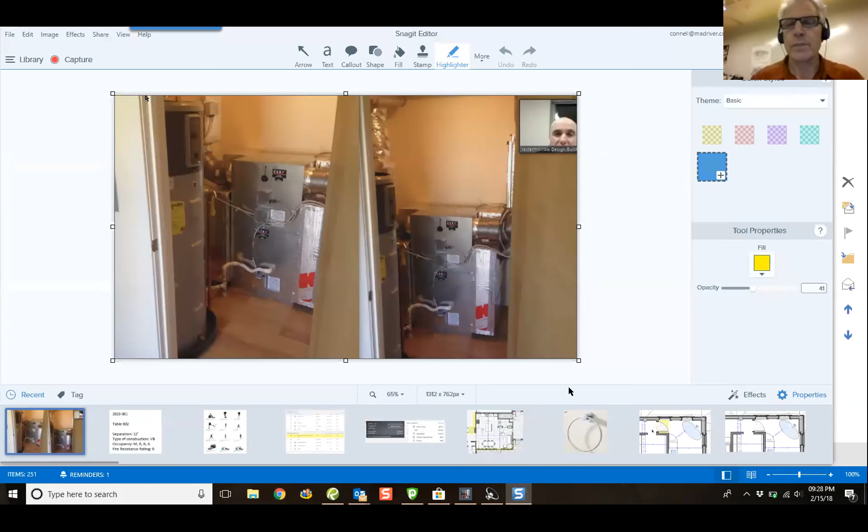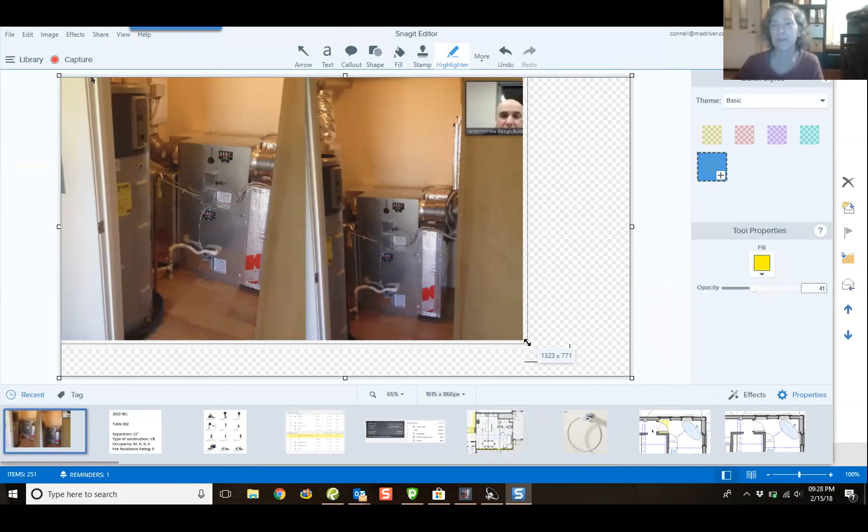Here it is. All right, so this is about as clunky as it gets, but can everybody see that? I'm still just seeing my model. Did you share your screen, John? Yeah, it says share. Nobody else sees it. No, I don't see it. Ron stopped sharing his screen. How do I stop sharing the screen? Right. I think that's the problem. Okay. Oh, stop share. Okay. Now there's the picture. Does everybody see this picture now? Sorry about that.

Yes. Okay. That's the size of the utility room that Vermod had for their model home. It's a minimum 6 by 6. That's how big the CERV is. The CERV2 is slightly smaller by 2 inches in width and in depth. This is the CERV1. Is the whole utility room 6 by 6? Yes. In here you've got the serve, the hot water tank to your left, and then the expansion tank next to the hot water tank. Okay, that makes sense. I thought you were saying just the serve alone is 6 by 6. No, the whole facility, they need 6 by 6, and that means everything.

Nice face there. How did that? Chrome dome. Okay, so we're obviously getting a little late here.

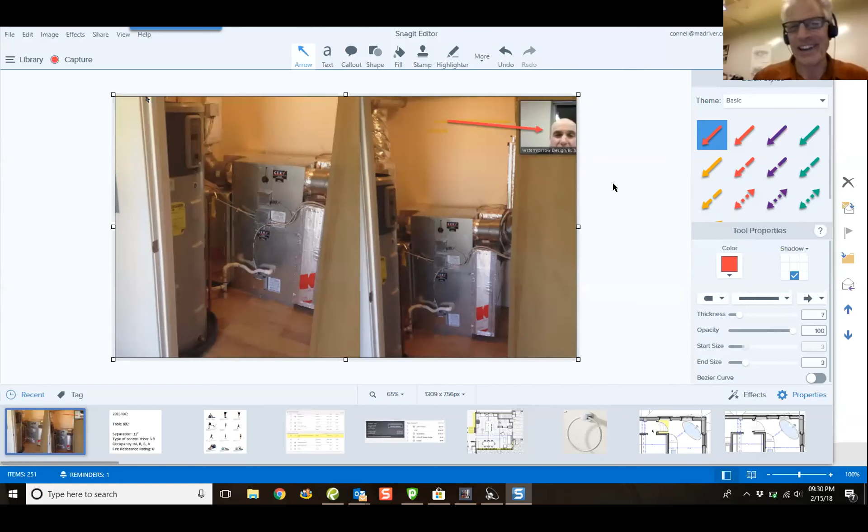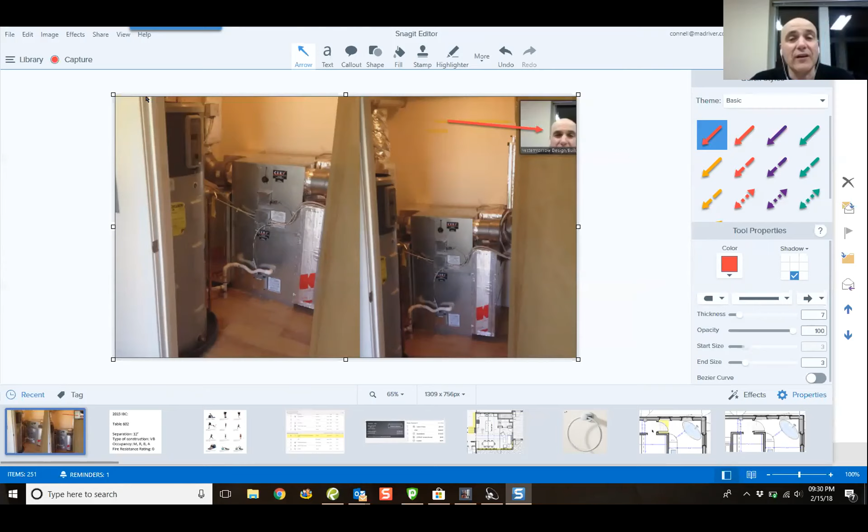How do I explain this? Water that's coming in from the well goes through the expansion tank and pressurizes the water so it goes through your faucet. It has to do with wells. It just has to do with wells? It's so you have consistent water pressure throughout your house, and also so your well pump doesn't run all the time. Whenever the pressure in the pressure tank gets down to usually like 20 or 15 pounds, a switch turns on your well pump. It pressurizes this localized little storage, so when you turn on your water you always get 15 PSI in your lines.

So no well, no problem with expansion. If you're using municipal water, you probably don't have it, or you might have it sometimes, but anyway. Okay. Gio, we're gonna have a well up here, so I'm gonna need that and everything else. So minimum 6 by 6 is what I need for the utility room. Well, 6 by 6 for the serve. So figure 8 by 8 is a good holding place. I mean, Gio, wouldn't one serve do both sides of this duplex?